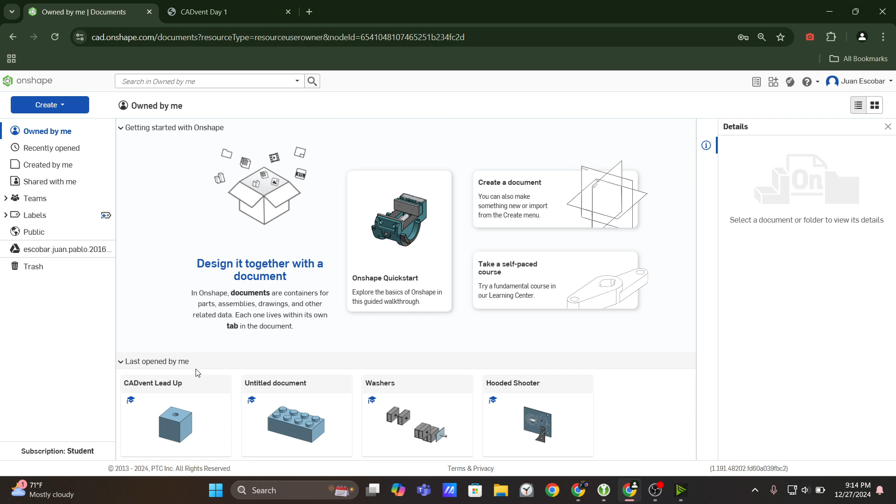Okay, let's see. I'm gonna go to my folder. Sorry for the delay. I should have had it open, but that's okay. Okay, let's make a new part studio. Okay, let's get started. It's only been, what, 40 seconds? That's fine. Okay, let's take a look.

So we have a cube, right? So that's the first thing I noticed. What's the general shape of the object and what's the orientation? So like we mentioned before, the default kind of view in drawings is what's called the isometric view. Let me show you what that is. It's a combination of the front, top, and side view, but basically you can go here and click isometric.

It's pretty similar to this top corner between the top, front, and right. Remember the orientation cube: we can click on faces to orient relative to those, and we can also click on corners. If we click on this top corner between the top, front, and right, that's pretty much this view. So I'm going to make this cube off this orientation. The bottom face of the cube, like if you were to lie it on the table, is going to lie on this top plane because it matches where that cube would go.

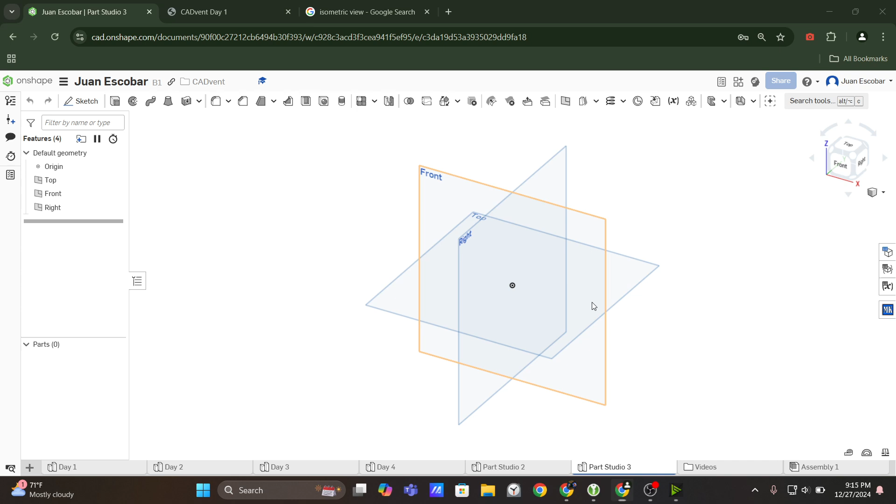If you can imagine where a cube's going to go, it's going to be like this. We're going to have the views pretty much align. Does that make sense? I'm going to make the object based on that. Obviously you can make it anywhere you want, but just for reference, that's where I'm going to make mine. I'm going to start with a base sketch. Remember, we can make sketches and extrude them to make objects.

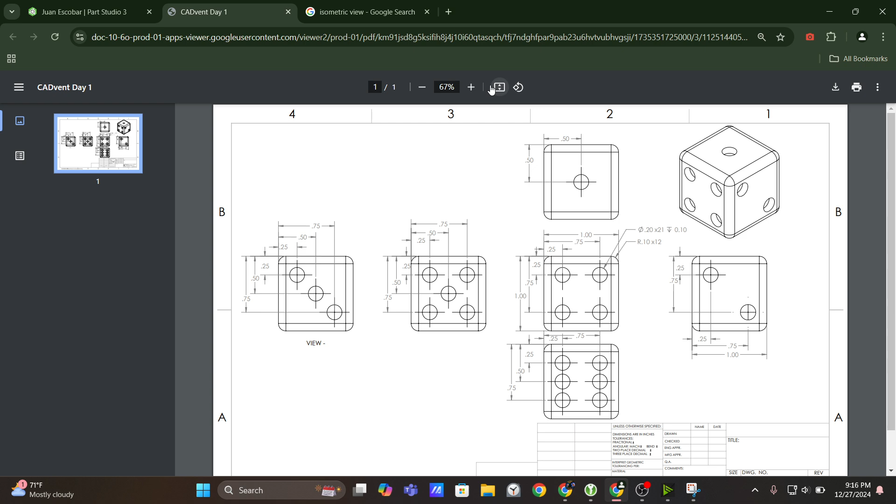So imagine I'm making this from the base up, but you can make it any way you want. It's just whatever's most convenient. The first thing I look for in the drawing is, what are the base dimensions of this cube? If I had to make just a square and extrude it, what would the dimensions of that square be? I talked about this once, but I'll talk about it again. When you have dimensions, it's really helpful to look at these arrows. There's a lot going on in this drawing, but the key thing to look at is arrows.

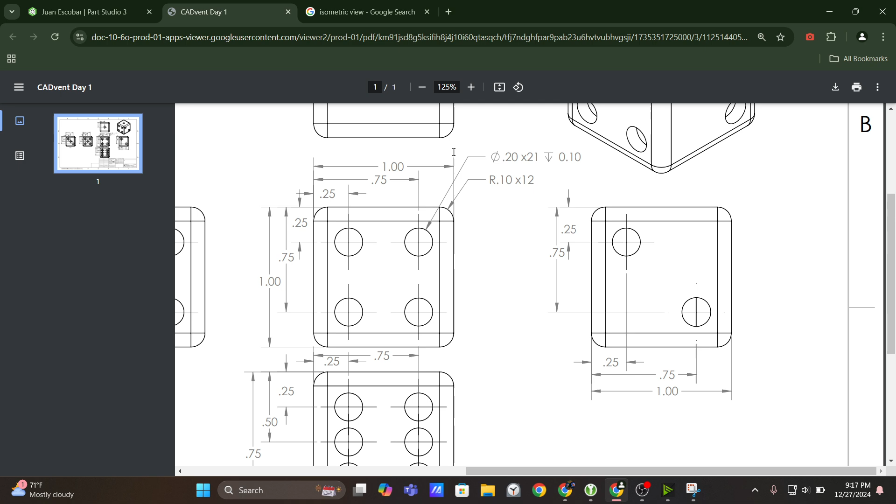If we look at this edge of this cube here, and then this edge here, the arrows go up to that line and whatever it is that they're marking. So it looks like the distance from one edge to one edge is 1 inch, and the distance from another edge to another edge is another inch. So I'm just getting the base dimensions. That's how I'm going to get started.

I'm going to make it on my top face, because I'm making basically the base. See how I clicked on the top corner? I'm going to make it on the top face, and then just extrude upward, like I'm building a building. You can do this any way, but that's how we're going to do it.

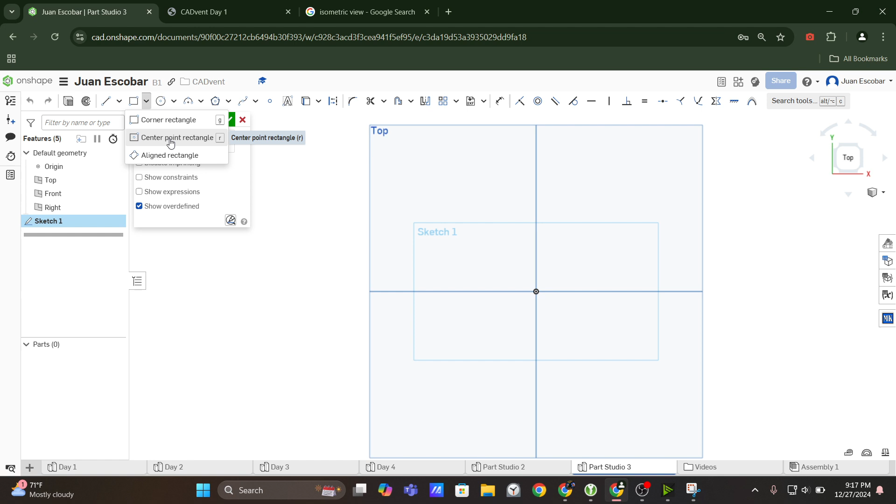Now I'm going to make a rectangle, but it's going to be a center rectangle. There's different types. There's corner rectangle, which is by clicking on two corners, and others, but the one I want is the center point rectangle. The advantage is I can make everything based off the origin, and that can be really handy later. So I'm going to just click once in the center, drag outward and click again.

Now the first thing I'm going to do, you can do this in any order, but I'm going to make opposite sides equal. So right now, to move objects you click on vertices, but both sides of this rectangle, both lengths, the width and the height, are undefined. So I'm going to make the width and the height equal to each other, the same length, which basically makes it a square. And now I'm going to make this an inch.

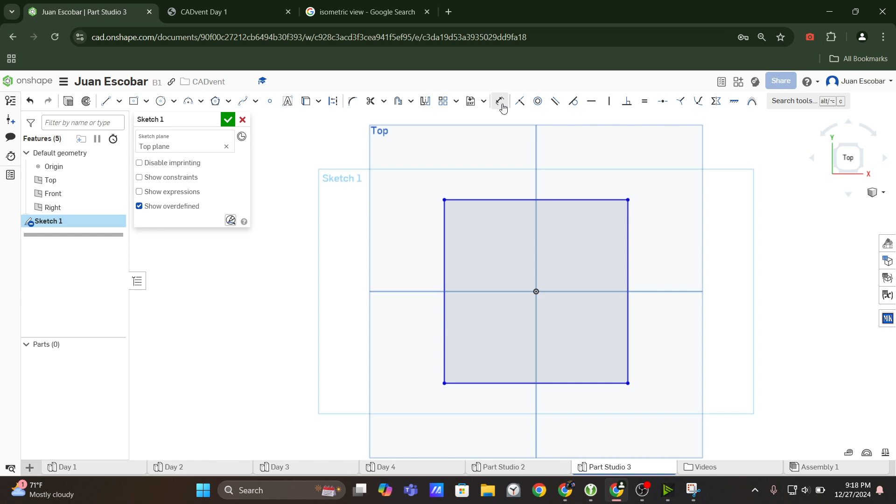So I'm going to press this dimension tool up here, click once on this length, drag outward, click again, and set it to 1 inch. And now what I'm going to do is extrude this.

So looking at this face, this view of 4 dots over here of the 4 sides is this view up here in the top. So this 1 inch dimension is telling us the height of this cube, whereas this dimension is telling us this dimension over here, and this dimension on the 2 side is telling us that.

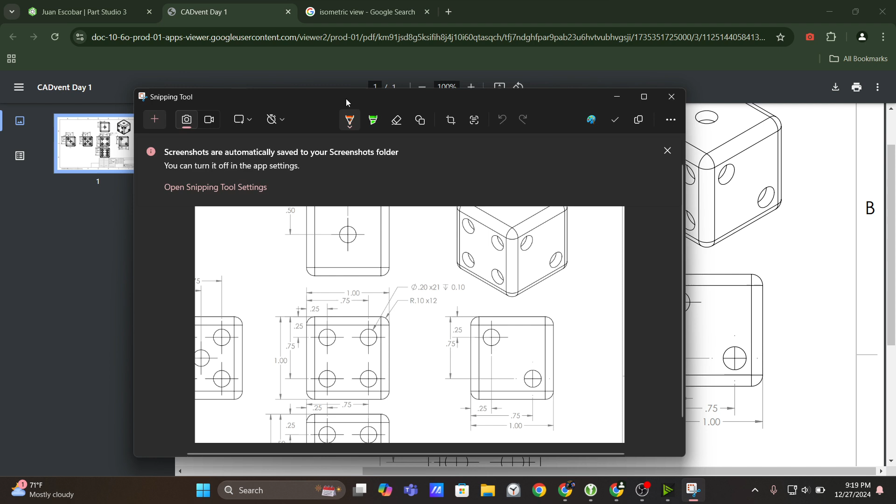And I'll show you what I mean. I'll make a quick sketch, just so this 2 face right here, this orientation corresponds with this up here. This other orientation, I'm going to just be as descriptive as possible. Feel free to skip it if I'm going over things that make sense.

But I just want to cover everything because I know sometimes it can be confusing. So see how those drawings align? Essentially this 1-inch dimension, remember the arrows, it goes up to here, and this other arrow goes up to here. So this dimension over here corresponds to basically the width of this cube.

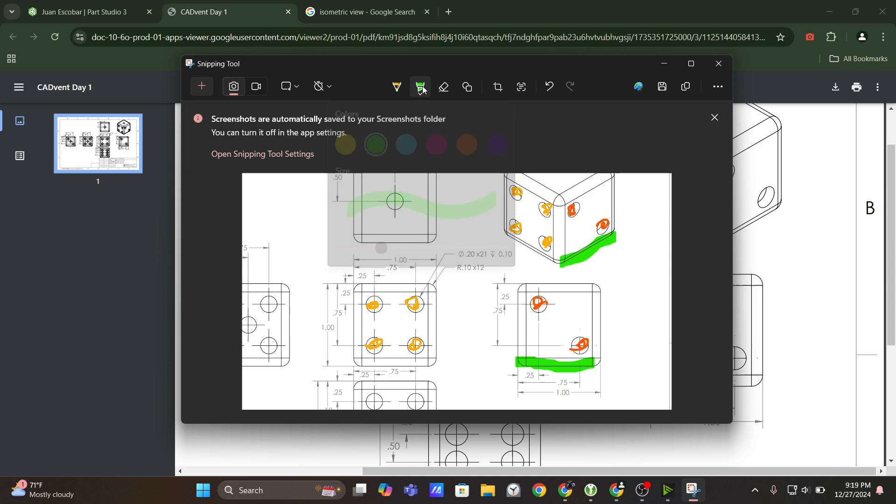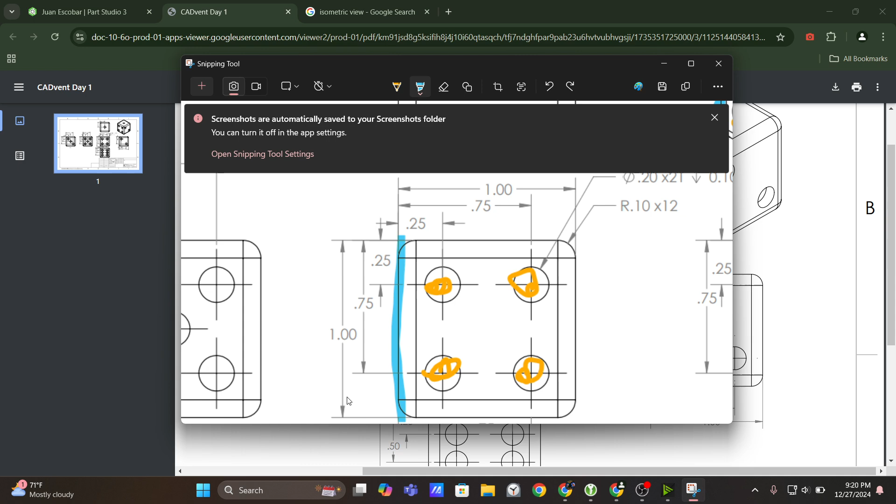Let's see, we're going to go a different color, blue. This dimension here is going to correspond with the height of our cube, right? Because basically, see the arrows, see how that arrow points to the line which goes to the top edge, and this arrow points to the line which goes to the bottom edge.

Okay, and now we're going to do the last one just so the point's clear. This top part of this drawing, again oriented on the 4-dot face, is this line. So that kind of tells us the base, the width, and the height, right?

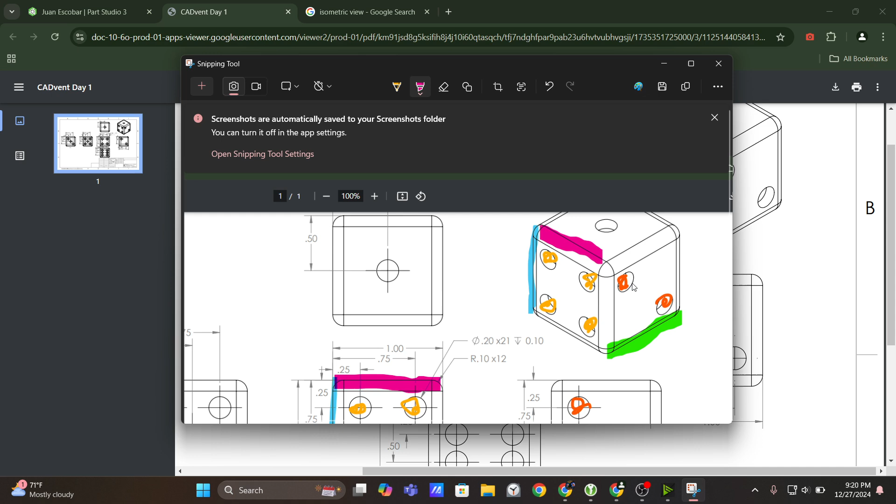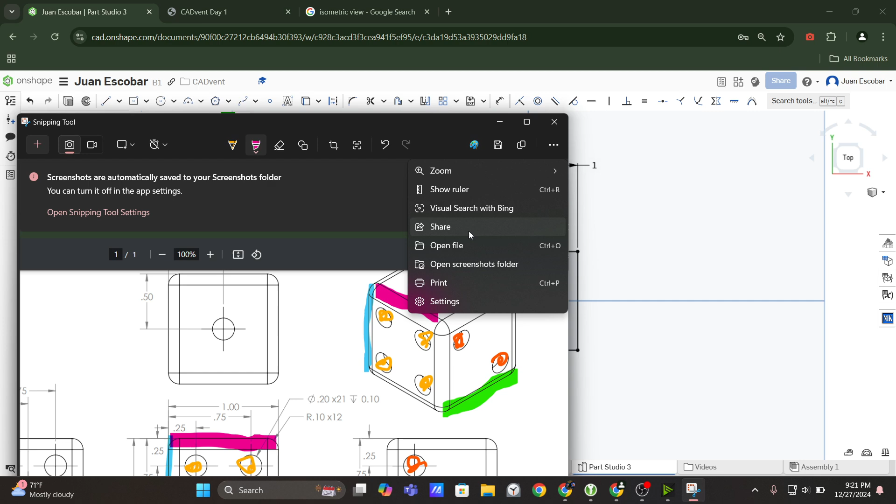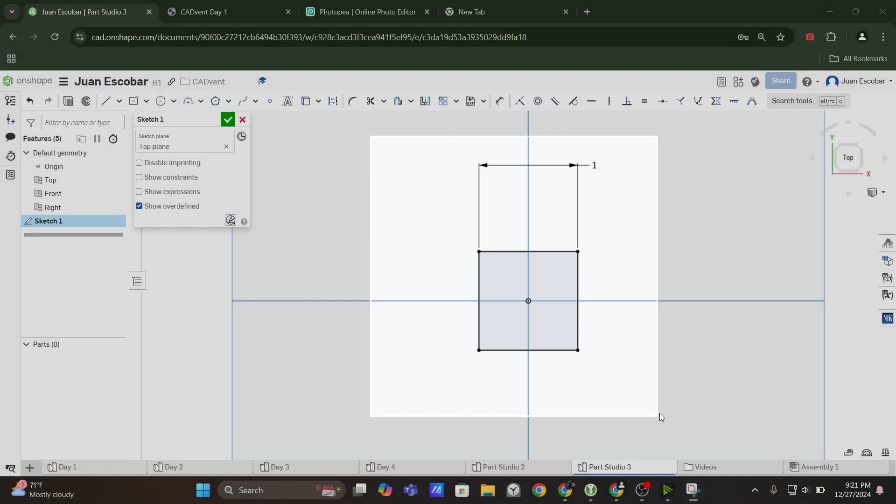Okay, but we have this view, right? So if we look at the top view now, a view from the top, if you imagine looking at the cube from the top, this pink over here is this dimension, right? And then the green is this dimension over here. So basically we're just making a top view with these dimensions that we found in our drawing, and we're like, okay, it's 1 inch by 1 inch by 1 inch.

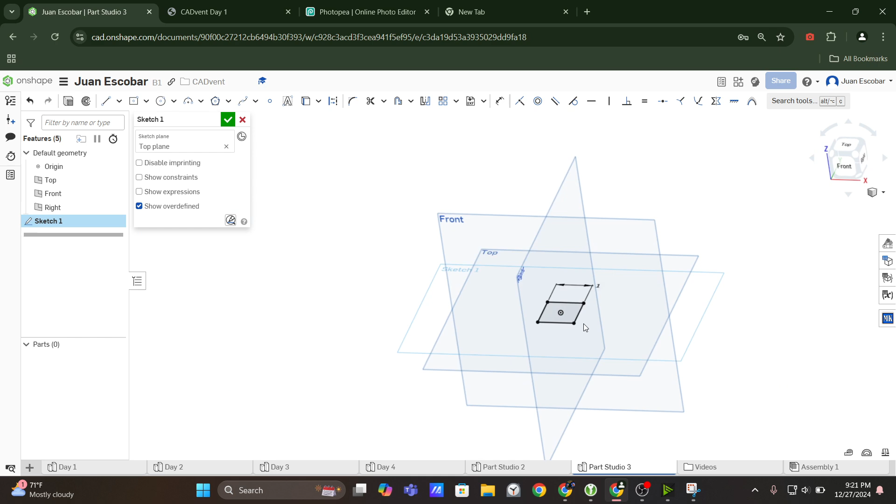So now we have our base of our cube, and now we're going to extrude it to the height, which is 1 inch. I'm going to click on the sketch, and there's a couple ways to do it. You can click on it in your view plane, or you can click on your sketch. So I'm going to click on this face here for starters, and extrude it the height, which is 1 inch. So now we have our base cube.

These rounded corners are fillets, and we'll add those at the end. But to get started, I'm going to talk about a couple of things. So let's take a look at that original drawing. Just like I talked about this again, whenever I'm talking, visuals really help me, so I'll include that for you too.

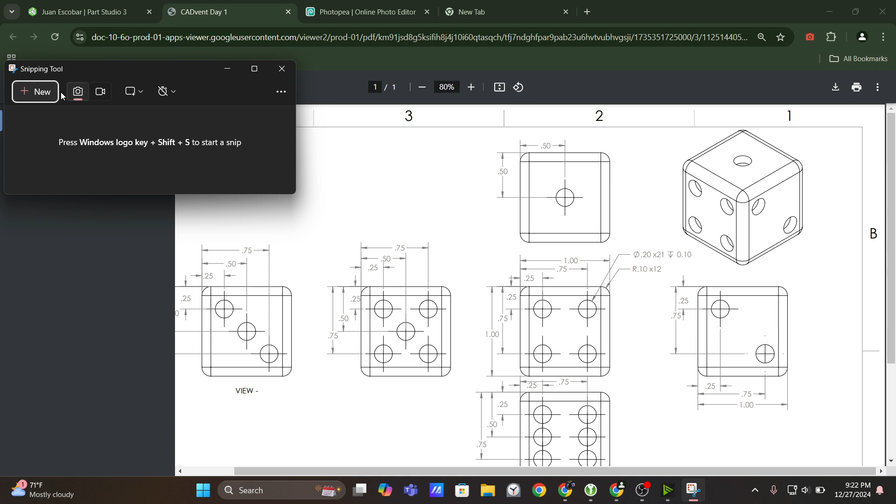So I'm just going to be as detailed as possible. So if we look at this view over here, all our views of our part line up with each other. So I'll explain what that means. Let's orient ourselves with this four-dotted face of our part.

So this on our main part is going to correspond over here on the drawing. What do I mean when I say all of the views of the part line up? Well, if you look directly to the left or to the right, you're going to see the 2-dotted view. That 2-dotted view directly to the right is basically like moving over one face on the cube.

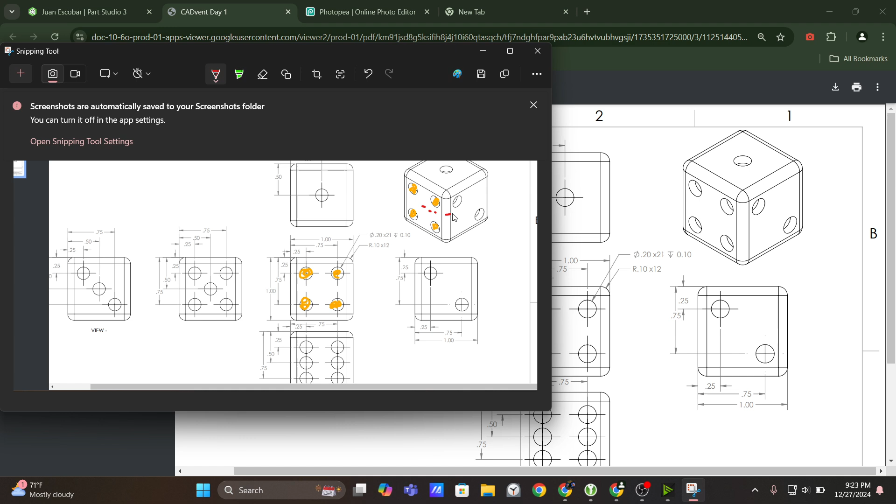I'm drawing hand signals, but you can't see them. Just imagine traveling over to this face now, and now you have this side. So that's what I mean when the drawings of the part line up. Looking directly to the left is basically moving around the cube, and that's going to give you this face over here.

Notice how in this face, the yellow is exactly horizontal with this part here. Basically, if you imagine drawing your finger along the face of the cube, it's going to exactly line up and be horizontal. So that's what I kind of mean.

Now, directly above is going to be the one-face cube. It's like moving up and going up a face. Does that make sense? These different views that are shown here are kind of like unwrapping this cube. Moving to the left or right is like rotating the cube, and going up is like looking at this top view. So they all align, and hopefully that makes sense.

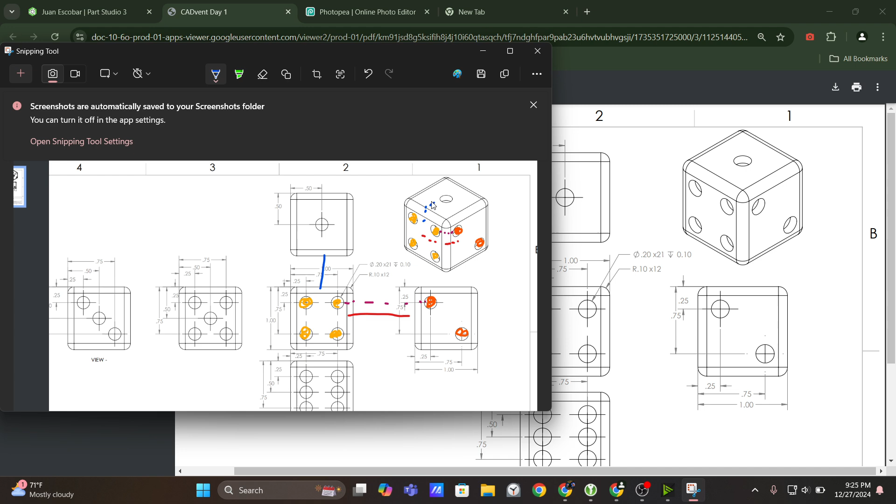So I'm going to start off with making the one on the top. We know it's at the top because we can look at this view here. The first time we made a sketch on a plane, but this time I'm going to make a sketch on a face. I'll click on the top face of the cube, since that's where we want it to show up, and click sketch. Then I'll orient myself using our orientation cube, click the top face, and zoom in.

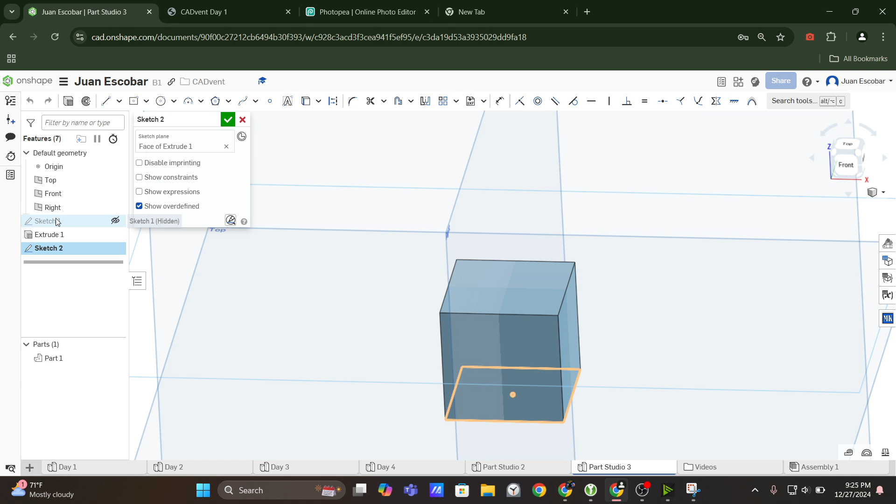Because we made our original sketch based off the origin, looking in the sketch, the center is the origin. So I can just make a circle from here and it's going to be from the center. I'll show you how to verify the dimensions. Now I'm going to go to the circle tool up here, click once for the center, drag out, and click again.

This circle has a dimension of 0.2. If you look here, this little circle with a line drawn through it represents the diameter of a circle. So if you look closely, the line drawn through that is like the diameter. So 0.2 is going to be the dimension, the diameter.

Times 21 means that same dimension of that circle is repeated 21 times, so that means it's for repeated dimensions. If you count the actual number of circles: 1 through 21. There's 21 of them, and all of them have a dimension of 0.2.

And then what does this last part mean? This is the depth of the extrusion. So these circles are going to be extruded inwards, removing material 0.1 of an inch. Hopefully that makes sense. But the diameter is 0.2. So I'm going to go over here, click on the dimension tool, click on the outer edge, drag my mouse outward, and click again.

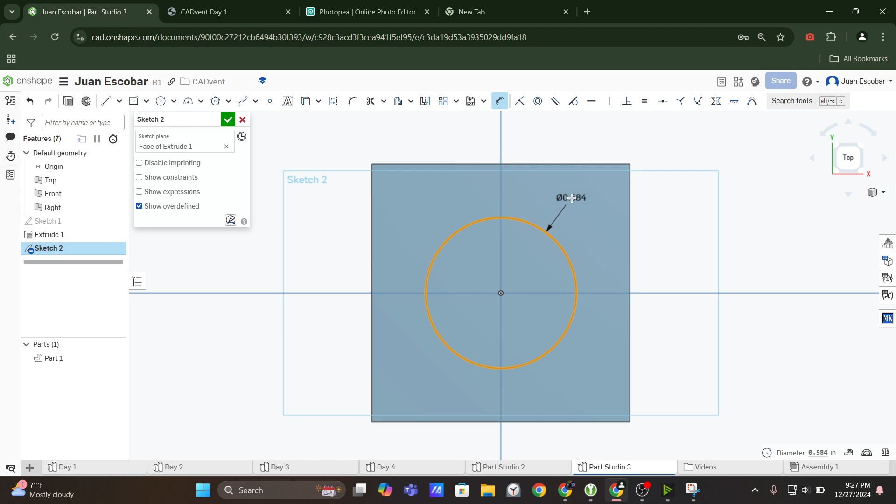I'm going to set that to 0.2. And because we made it on the origin, when you're making a circle, these auto constraints pop up. See how when I'm hovering directly over the center, there's a little icon there on the side? That's a constraint — that's coincident.

Coincident basically means two or more entities touch each other, as Onshape defines it. So if I click here, you see that icon, meaning the center of the circle is going to be exactly on the origin. Now we won't be able to move the circle around.

But let's say I didn't make it on the origin — I made it somewhere else. I can click here, then click on the center of that circle and drag it around anywhere I want. It's not constrained. But when making that initial circle, we can make it coincident with the origin. Hopefully that makes sense.

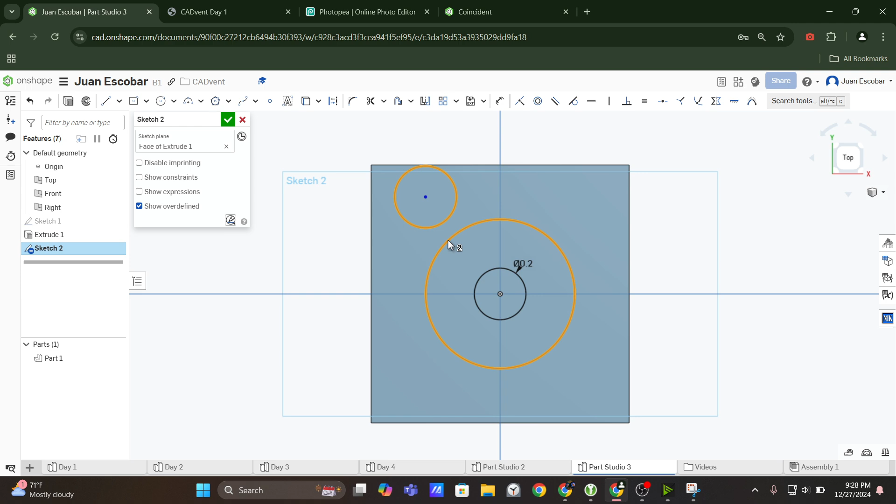Now, how do we verify? This has these dimensions here, 1/2 inch and 1/2 inch. How do we make sure it looks like it's in the center? Well, first of all, you know it's a 1 inch by 1 inch cube, so that is exactly half.

But if you wanted to check, I can click on the center of the circle, the origin, and click on the outer edge of the cube. Now if I go to the dimension tool, you'll see a couple of things — it'll show the minimum distance between both points, but also a breakdown between these coordinates.

If you look at the red dotted line from here to here, that distance is equal to 1/2 inch. Then the green distance tells you the vertical distance — the distance from here to here, same as it would be over here — and you can see it's 1/2 inch too. So it matches up in our drawing, and the circle is exactly in the center.

Now I'm going to press the check mark to confirm our sketch, and click extrude. I'm going to change it — these extrudes, the circles go inwards, they're removing material, so I'll click remove. Remember how I said we can click on either the face we want to extrude, or we can click on the sketch on the side.

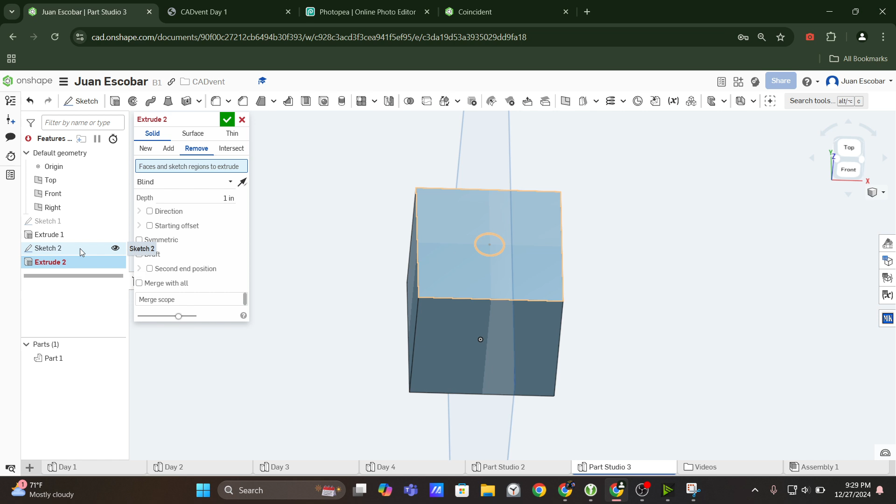So I'm going to click the sketch on the side. Remember the depth is going to be 0.1, so I'll set it to 0.1. And bam, look, we got our very first face done. You can click on that corner, that top corner, like I said, and now you see how this is lining up here.

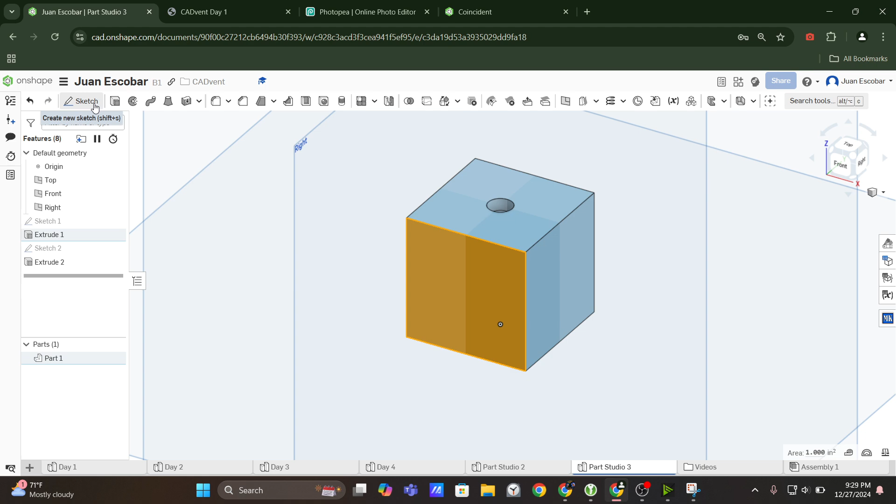So I'm going to do this 4-sided face, which is right below in the view and rotated down one. I'm going to click on this face and click sketch. Now we're going to do this.

Just to keep things simple, I'm going to make 4 circles, and then I'll show you how to use the linear pattern tool — I know we talked about it, but I want to show you as a reference. So I'll start off with making 4 circles, and remember all 4 circles have an equal diameter, so I'll just place them down randomly.

I'm going to click on the outer edge of all of them and make them all equal, with a dimension of 0.2. Remember, I can just do one of them and all of them will update to the right size because I added that equal constraint.

And now I'm going to dimension from the center of the circles. A lot of these dimensions are kind of overwhelming, but you can see it's from the top; if you look at the arrows, it's from here to here. This whole horizontal distance here is going to be 1/4 inch. If you look at the arrows here, this vertical distance is going to be 1/4 inch. So from here to here, remember that dimension view from earlier, is going to be 1/4 inch and 1/4 inch.

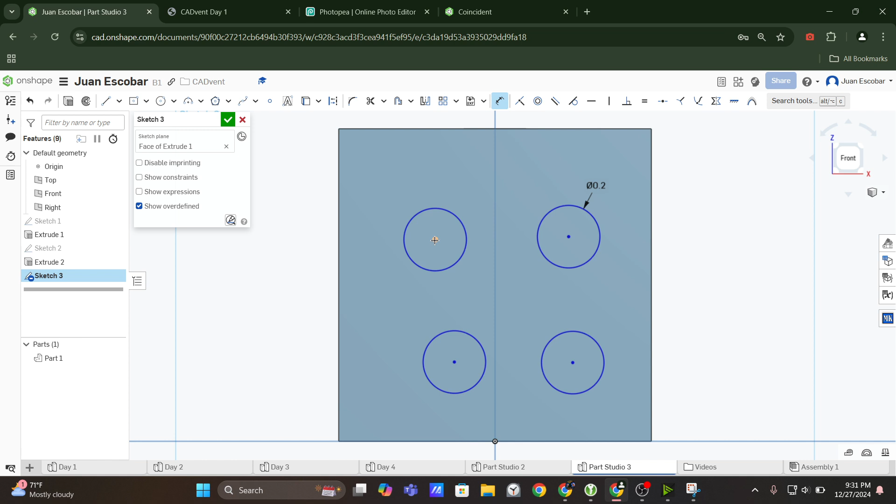So that's what I'm going to do. I'm going to click dimension, and I'm going to do it a couple different ways just so you see. You can dimension from a point to a line, and I'm going to set it to be 0.25. And I'm going to do from a point to a line. Remember, there's different ways of doing dimensions, but I'll do different ways for each one. I'm going to set it at 0.25. Now, for this bottom one, you can see also, if you look vertically, it's also 0.25 from the side.

So just like I clicked on here and then the line, I can also click on the 2 points. If you remember how we did from a circle to a corner, we had the breakdown. You can kind of specify, I'll show you. I clicked once on the center, and now I'm going to click on the corner. And see how we have the 3 options? Remember those 3 dimensions from earlier? We had the minimum distance, the horizontal part, and the vertical part. So I'm going to do the horizontal part. I'm going to click confirm, and I'm going to set it to 0.25 inches.

Now, what's the distance from here to the top? Well, let's look at our dimensions from the center of the circle. So I'm going to look horizontally. See that arrow pointing? That line goes all the way up to the top. And from here to the top is going to be 0.75. So I'm going to click dimension, and I'm not going to do the corner this time. I'm just going to go from here to the top face and make that 0.75 inches. Cool. Now, what am I going to do?

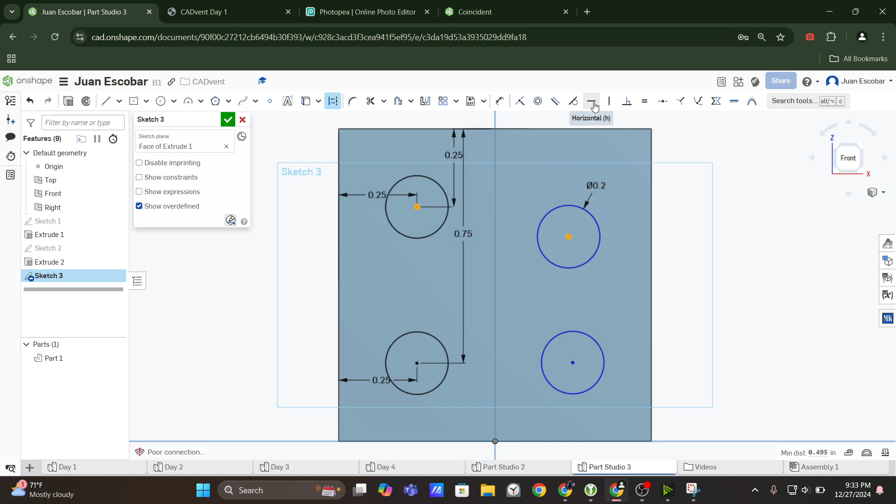I can do a couple things. These dimensions kind of just repeat. For this other circle, it's also going to be 1/4 inch. For this bottom circle, it's also going to be 0.75 inches. And you can see that they're exactly horizontal in the drawing. So, just to change it up a bit, I'm going to add a horizontal constraint between the center of this circle and the center of this circle, and I'm going to click horizontal to make them horizontal. Now this circle is constrained in space to move only horizontally relative to this other circle.

The 2 points are horizontal, and I'm going to do the same thing for this other one and add a horizontal constraint. And notice another thing, these 2 circles over here are vertical. Isn't that pretty cool? They're vertical, so I'm going to add a vertical constraint, clicking on the center and on the center and making them vertical. And now you can see by adding constraints, we're limiting the position of where these can be.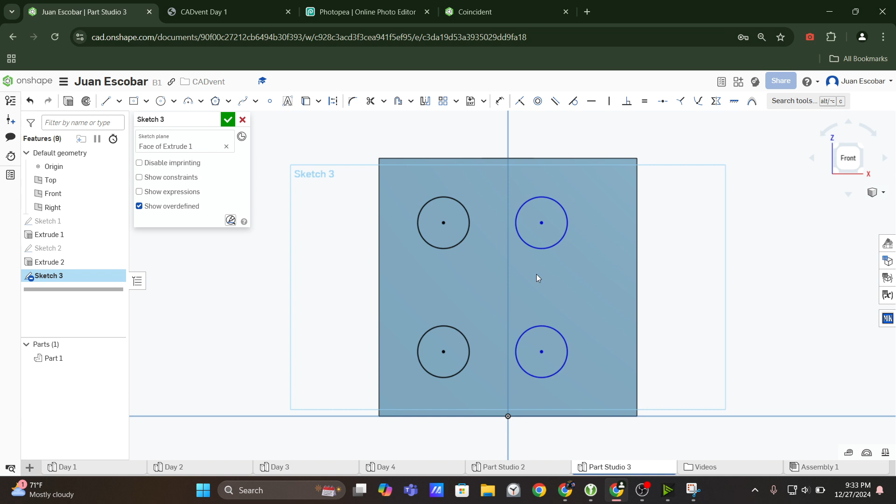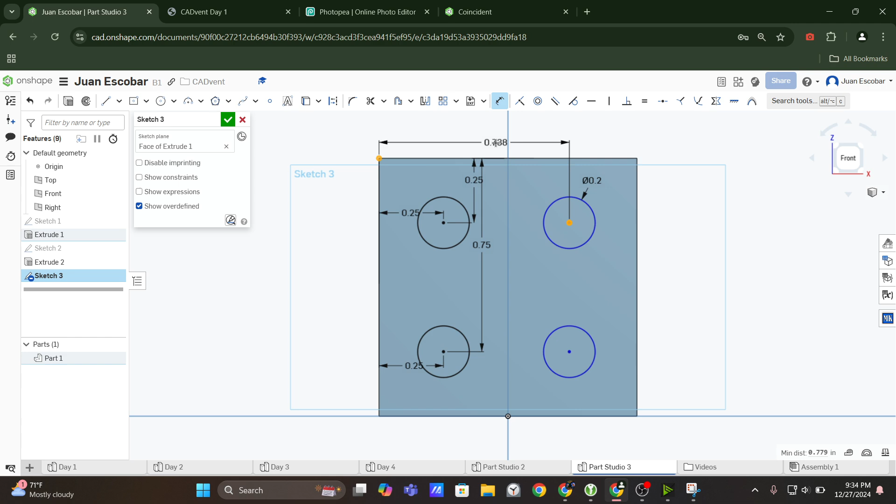So what's next? What dimension are we missing? The only motion that we have right here is side-to-side motion. So we're only missing a sideways dimension from here to another part of the cube. The center of this circle to the outer edge is 0.75, 3/4 of an inch. So I'm going to click on the center, and I'm going to do the corner because I want to. We have the minimum distance, and I'm going to do that horizontal distance, and it's 0.75. And notice I click enter, and now we have this fully defined.

And notice there's way more dimensions on here. There's 1, 2, 3, 4, 5, 6. We only have 1, 2, 3, 4, 5. Okay, we have 5, almost as many, but you can add constraints to minimize the amount of dimensions you have. Instead of adding another dimension from here to the top and from here to the top, we can just make horizontal and vertical constraints. Hopefully that makes sense. Now I'm going to click the check mark to confirm, extrude, and remember these have a depth of 0.1 inches.

So I'm going to make that a depth, change it from add to remove, and change it to 0.1. And I'm going to make it inwards. Click check mark to confirm. Now we have the 4 circles done. Oof, look, we're breezing through it.

Okay, what's next? Now we're going to add these 2 circles. And for that one, I'm going to just draw them manually. And for this bottom one, I'll show you a linear pattern. So I'm going to just click on this face, check our drawing, make sure it lines up, and click sketch. And now I'm going to click this right face on the cube to orient us, and I'm going to zoom in with the scroll wheel.

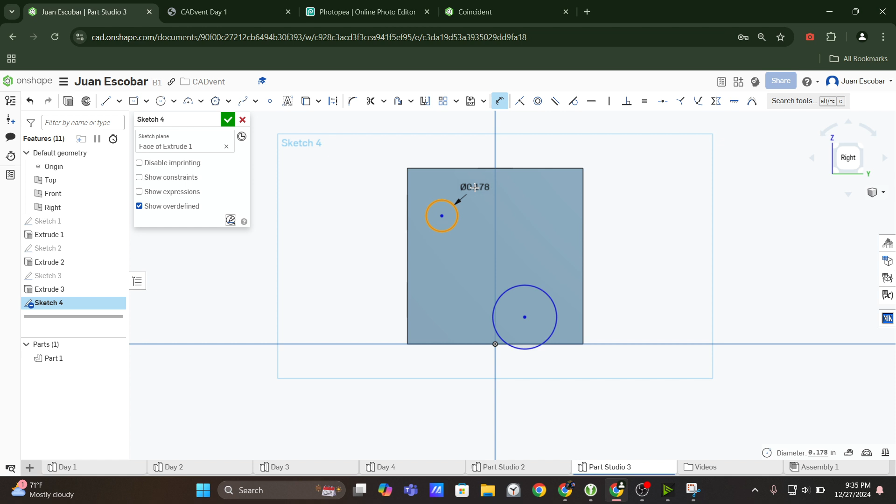And now I'm going to add 2 circles, make them equal to each other, and set the diameter of them to be 0.2. So I'm going to press the dimension tool, click on the outer edge, click again, 0.2, make these 2 circles equal by pressing E or clicking up here. And now we're going to add our dimensions from here to the edge.

So let's look down because we do have a dimension down here. From here to the edge, looking at the arrows. See, these are pointing to that line. Check where the arrows point. So basically from here to here, it's going to be a distance of 0.25. So I'm going to add a dimension of 0.25 from here to the edge.

From here to the edge, looking here vertically, 0.75 from here to here, looking at the arrows. And see, the arrows are on the inside, whereas here it's on the outside, but just check where they're pointing and you'll see how that works. So I'm going to make a dimension from here to the outer edge and make it 0.75.

Bam, and now see where our circles are defined in space? They can't move at all side to side, but they can move vertically. So that shows me that we're missing a vertical dimension. So how much distance is there vertically, either from here to the top or from here to the bottom? We do have a dimension here that's from here to the top. So look at the arrows, to the top, 0.25.

So I'm going to add a dimension, make it 0.25. And you can also move these. So I'm going to click and drag just so they look nicer. You can move them around, you can move the number, you can do all sorts of things. And now it's black, which means it's fully defined and it can't move at all.

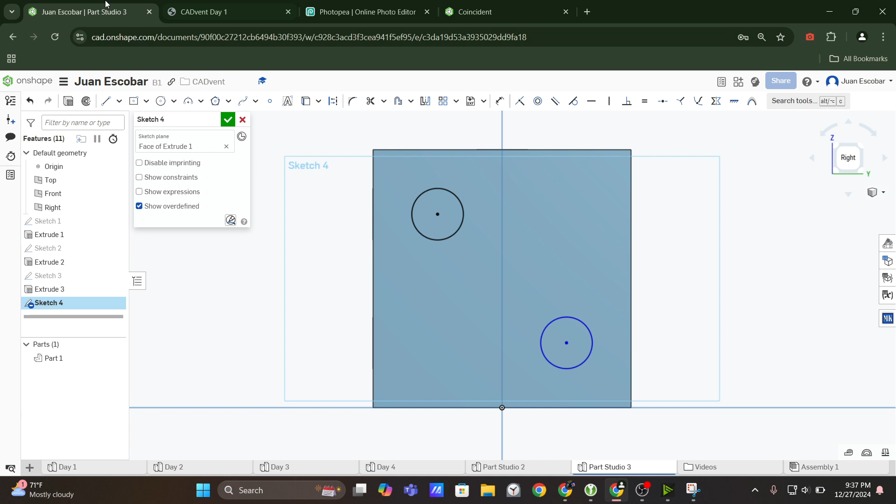And now let's look at this bottom one. It can't move at all side to side, but we're missing another vertical dimension. So from the center of the circle to the top, if you look at the side, it's 0.75.

So, bam. And I know it can be kind of overwhelming because you look at the whole drawing and it's like, oh, look at all these dimensions, how am I going to do this? But it's just taking it one step at a time, because you see, we didn't even use all these dimensions. We only used 4 of them. And right here, there's way more. Like this 1-inch one is from earlier, and we didn't even have to look at it at all to make it. And now everything is black, it's fully defined.

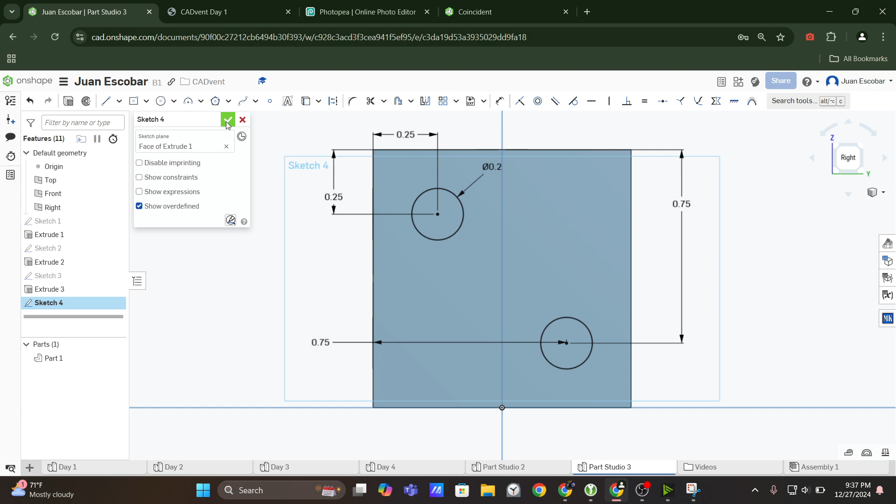I'm going to press check mark, extrude, click on the sketch, change it to remove 0.1 inches, check mark to confirm, and bam, look, we've got it. These faces line up. So what am I going to do next? Now I'm going to do the 6-sided face, which I'm going to use a linear pattern for.

So remember our orientation from earlier, which is here. Directly above the 4 inch is the 1 inch, so that's like moving upward. Directly to the right of it is the 2 inch, and that's like moving to the side. So directly below it is the 6-sided face, 6 indents, whatever you want to call them. So that's going to be like rotating. Instead of going above, it's going to be going below.

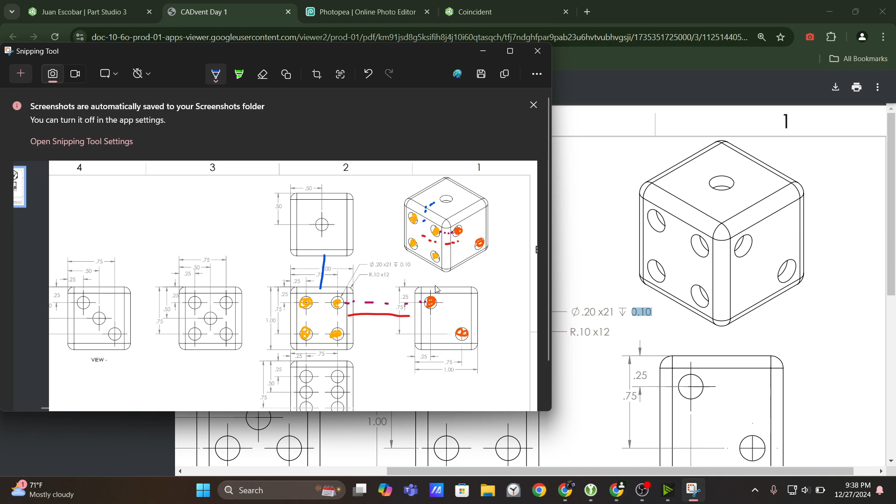So what that looks like, I click on the top. Instead of moving up, pretend that I'm looking at the front. Instead of moving up to the top face, starting from the 4, I'm going to just go down, and you can click on these little, oh, wrong direction. I'm going to go down and go to the 6-sided face.

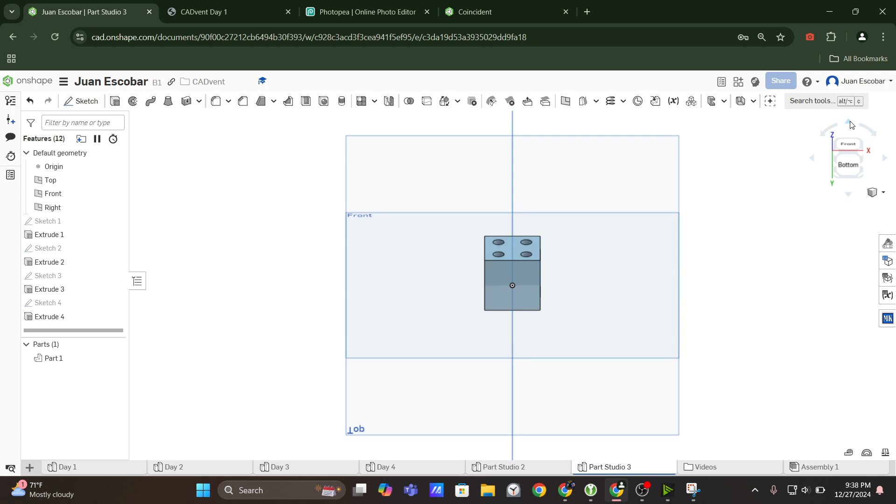So right here, right now, we're oriented to where we want to be. And the 6-sided face should be made here. Now notice it's kind of upside down, but that's okay. It should be based on this view right here. So now I'm going to get started. I'm going to make a linear pattern.

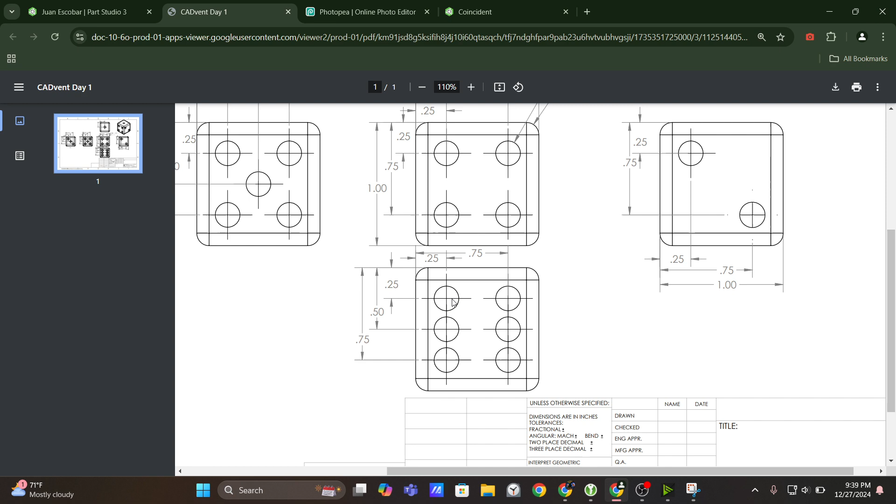So how do linear patterns work? Basically, you can make one element and then make an array of them after that. So I'm going to start with just this one circle and make the rest of these circles based on the distance between, because it's repetitive, right? So the distance from here to here is the same as from here to here.

See how those repeat, and the distance from here to here is the same as the distance from here to here, and on the bottom and from here to here. So they kind of repeat, and you can just set one distance downward and one distance horizontally, one vertical and one horizontal, and then the rest of them will just pop up.

So I'm going to start with my first circle, which is going to be a diameter of 0.2, like we remember, and I'm going to define it in space. Basically, where is it? So from the top corner, it's 0.25 inches, looking at the arrows here to the edge, and from here to the top edge, it's 0.25 from here to here and 0.25 from here to here. And you can verify with those dimensions.

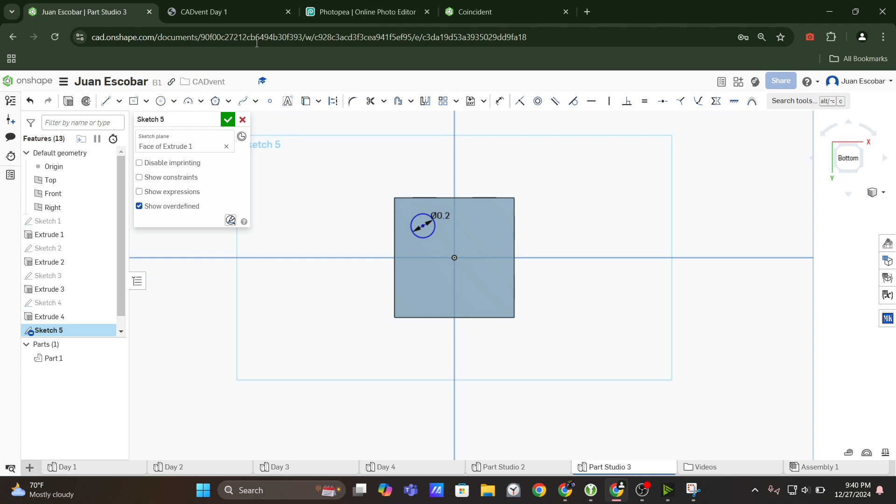So I'm going to set it with from here to the top corner, 0.25, here to the top corner, going vertically 0.25. And now this one is set in space. And now I'm going to repeat the 6. So just like I talked about, linear pattern is right here. If you're not sure how to find it, you can click search and type in linear pattern.

And see how we have the 2 arrows? These 2 arrows basically control the directions of where the array is made. So I'll show you what that means.

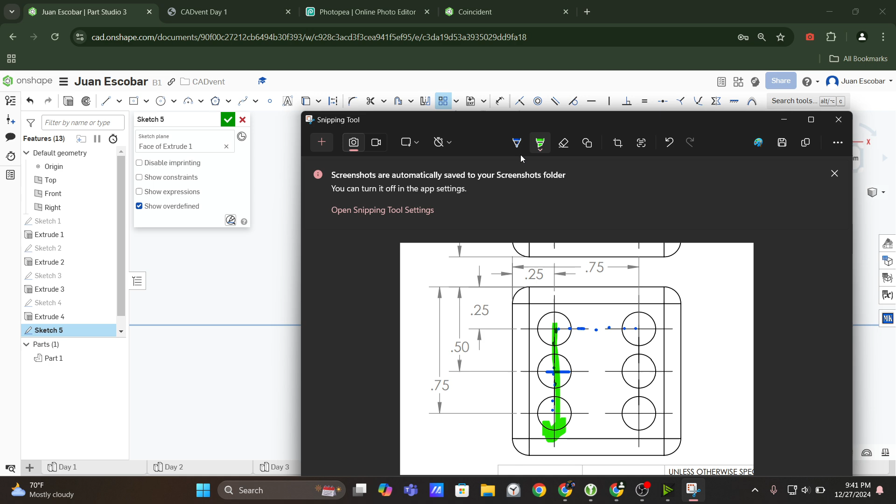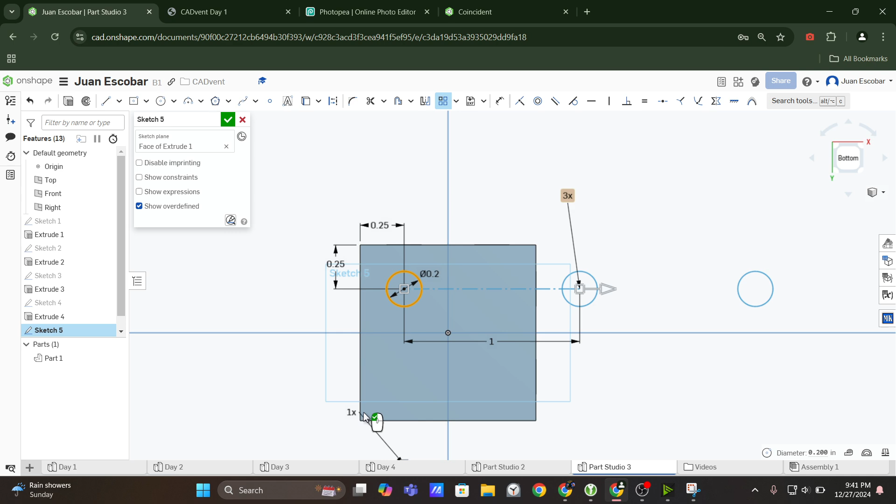Imagine one of the directions is going from here with like an arrow, and then the other one is going over here. It's kind of like setting your axes a little bit, but you can click on these arrows to change their directions. So I'm going to make this one go down and this one go to the side, and see how they're lining up. And there's also these times 3x, 1x, and this controls how many times I should pattern this in this direction.

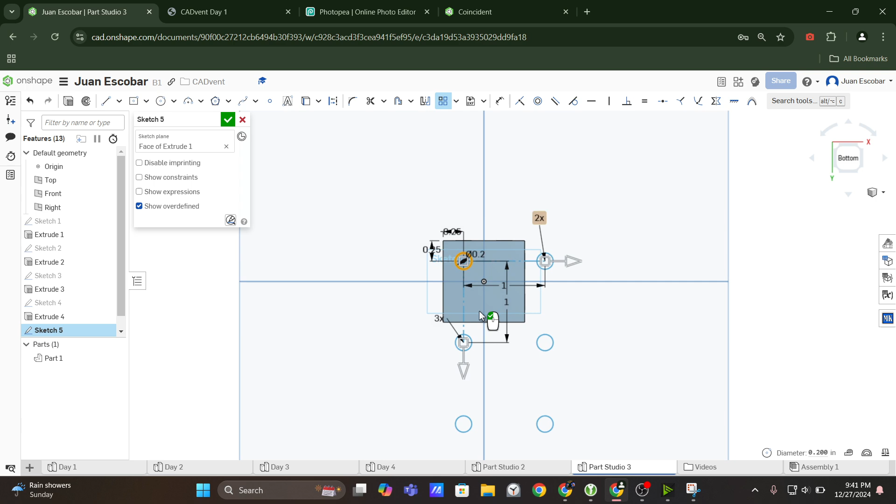So if you look in this direction, we only have 1 and then 2. So I'm going to change this to be 2. And then in the bottom direction going downward, I have 1, 2, 3. So I'm going to change it to be 3. Double click and click 3. And now if you look, we can drag these arrows and basically change where these should go.

And now I'm going to move these dimensions out of the way just so they're clear. I haven't yet confirmed this feature. But what I'm going to do is I'm going to confirm it. You left click and you see that icon next to the mouse. You left click to confirm.

And right now, because of these dimensions that are just arbitrarily there, everything's fully defined because the distance from here to here is set, and the distance from here to here is set in these dimensions. But these dimensions aren't right. So now what we can do is we can double click on them to change them. So I'm going to double click on this, and you can see the distance from here to here.

Well, the distance from the center of this circle to the edge is 0.25 inches. The distance of the center of this circle to the edge is 0.75 inches. So the difference between these two is 0.75 minus 0.25. That's the difference. And you can just do that with your dimensions to make it a difference.

And now the distance from here to here, well, how do I know? Well, you can do the same thing again and say, okay, the difference between 0.5 and 0.25 is 0.25. But let's say we didn't want to do that for some reason. I can just click on this dimension and get rid of it. And now, see how it's blue again? These aren't constrained vertically because the distance between these isn't set.

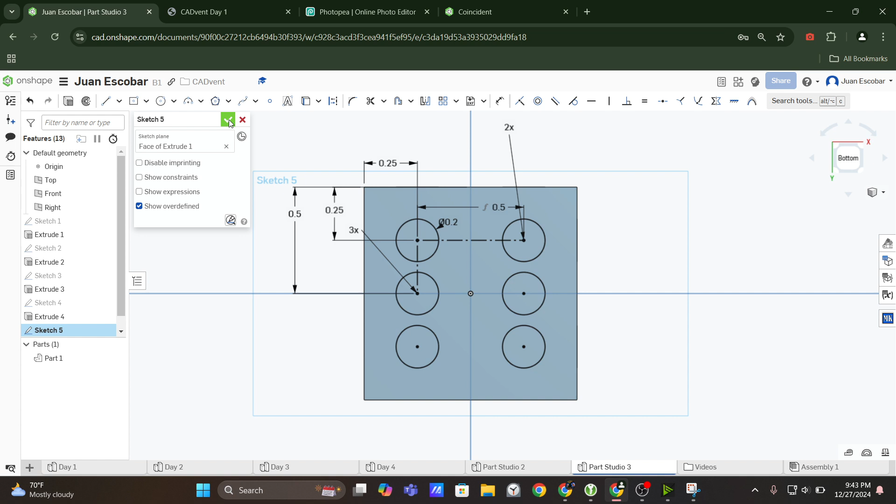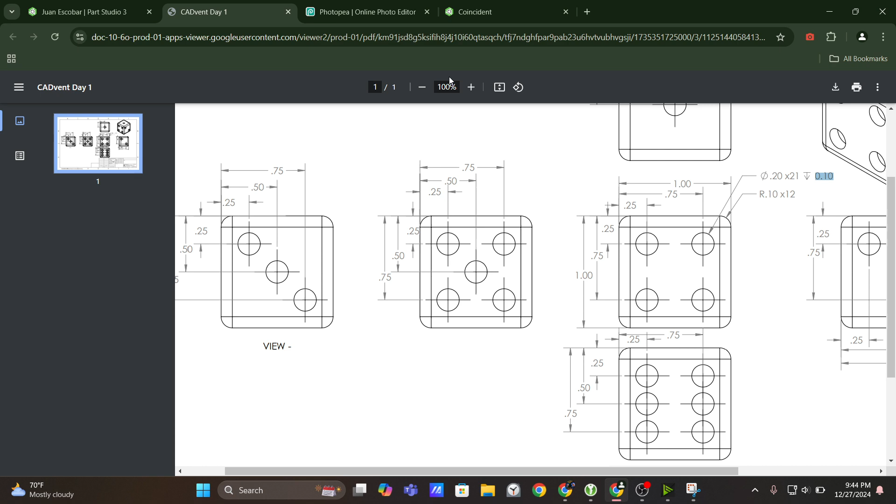And now I can click and everything's black, so we're all in the clear. I'm going to check to confirm, and look, we did it. We have the six-sided face, so I'm going to click check mark, remove, change the direction, and make it 0.1. Fantastic. And so look, even though the 6 wasn't in this top drawing up here, we knew because it was below that it would be right under in that direction. So now what's left? We did this side, this side, this side, this side. So we've just got these other two left.

So I'm gonna go to this 4 side, and again, it's like rotating to get to the 5. And you can also just click on the left, or if you were just looking here, you could be like, oh, okay, it's going to be the left, front, and then left. And you can just click on the left up top there. Now we're going to have this 5 pattern.

How are we on time? A little long. That's fine. Never hurt anyone.

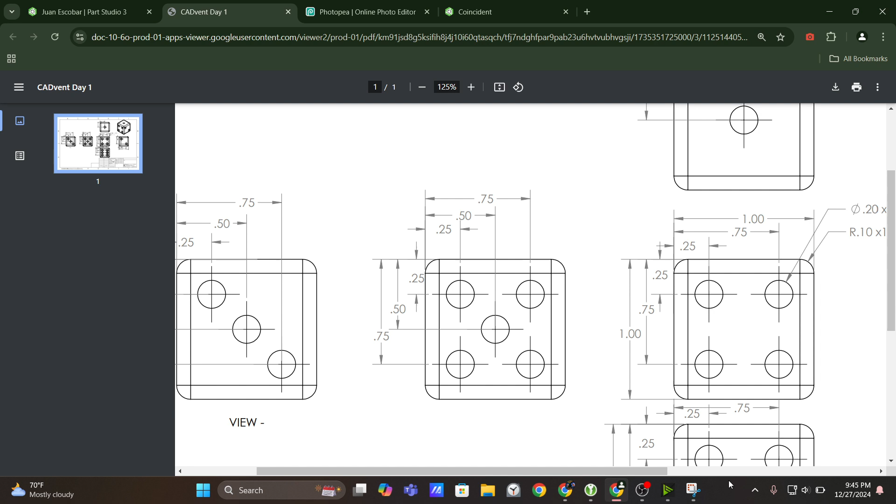And I'm going to click sketch. If you can follow along as you're doing this, that would be awesome. And we can get it done. And so I'm going to take a look and say, okay, what's actually happening here in the sketch? We've got all these dimensions, but what do I see when I'm looking at this? So just like we have a pattern here with an array of these in both directions, I'm going to see if I can actually find one here.

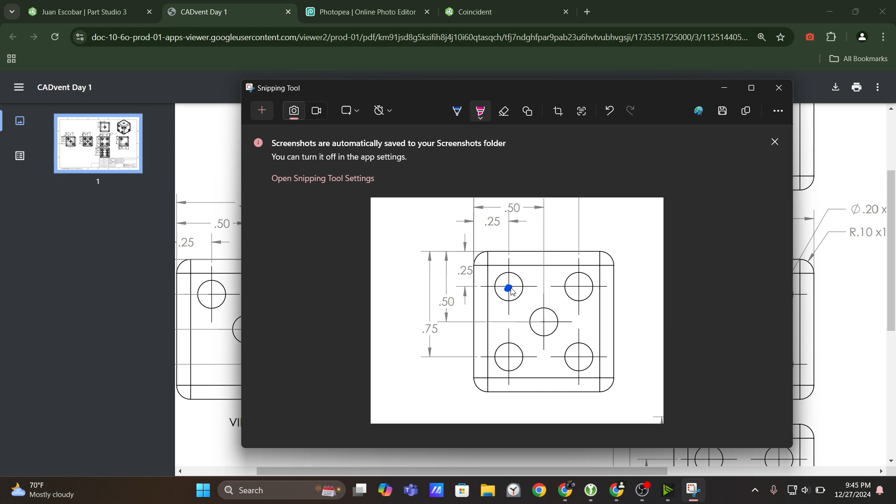So we have the center circle, and we can kind of see how going in one direction, we have another circle, and then going in the other direction, we have another circle here. So we have essentially these 4 circles that are in a pattern. 1, 2, 3, 4. The horizontal distance from here to here is the same as from here to here, and this vertical distance is the same as here to here. So you can make this a linear pattern.

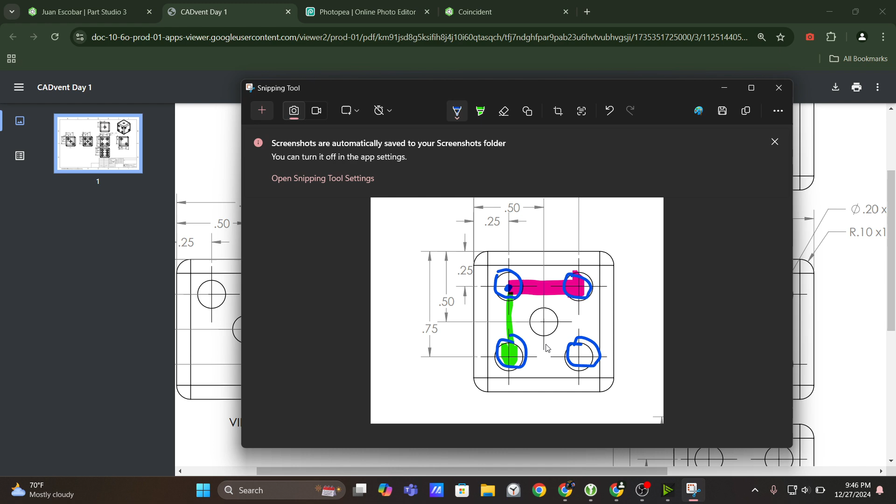Basically, make this top circle defined and add these 4 based on the distance between here and all the other elements, and then just add an extra circle in the center. So that's what we're actually going to do. I'm going to make a top circle, 0.2, as we know, and set it in space. I wonder if it'll be 0.25 and 0.25. Guess what? It is 0.25 and 0.25 from here to the top and from here to the side.

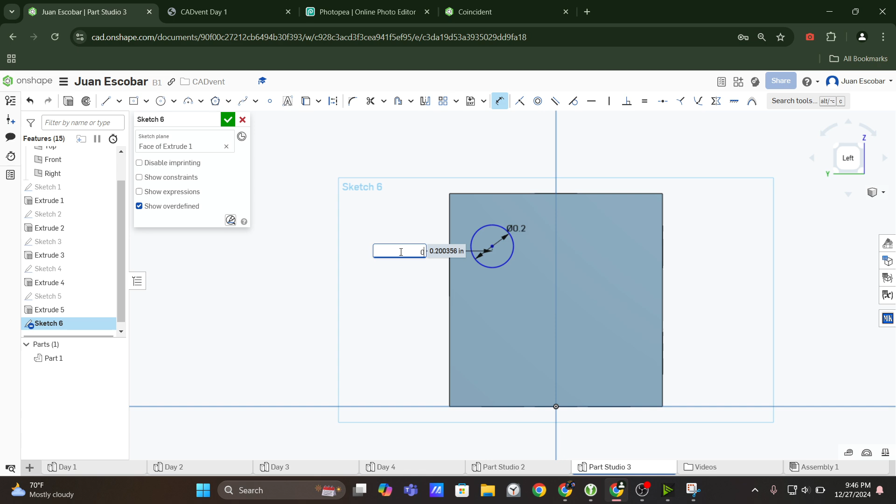So I'm going to press dimension. I'm going to do from here to this side here, set it to 0.25, do this. I'm going a little fast, but hopefully everything that I'm doing makes sense. 0.25, 0.25. Cool. I'm going to move it over here because I kind of don't like where it looks, and see what we're matching up. Now we're going to add a linear pattern.

I'm going to click here, click linear pattern, click on my arrows, change direction. So now we're going down and to the side, which matches up here, down and to the side. And it's going to be, whoa. See how I confirmed that? I accidentally did that. That was an accident. And now I don't have the other direction and I can't change it.

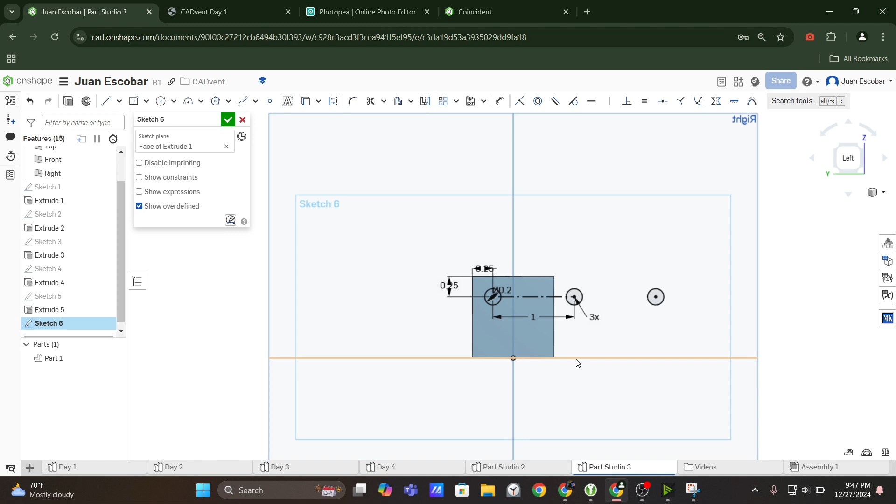So what I'm going to do is I'm going to simply Control Z to undo. So I'm going to click it again, linear pattern again. It's not a problem. And now I'm going to change the direction, and it's 2 by 2. So I'm going to set this 2 by 2 and drag these arrows roughly to get them in place. And now I'm going to zoom in.

And let's say these dimensions are useless. I'll get rid of them both. Just to reiterate the other thing that I said earlier, you don't need those dimensions necessarily. Right now, these are all just defined as they're linear. It's a linear pattern, but you don't necessarily need those 2 dimensions. So I'll just set an arbitrary direction.

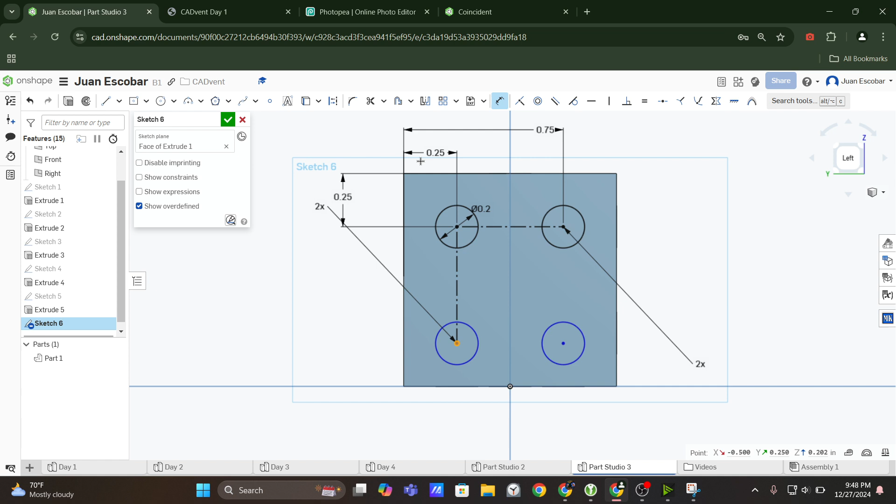So from the center of this circle to the edge, looking vertically, here to the edge is 0.75. So I'm going to add a dimension from here to the edge, 0.75, and from, let's say, this bottom one from here to the top, it's 0.75. From here to the top, 0.75. And now we didn't necessarily have to have the distance between each of them, but we can just add the dimensions that we know. And bam, we've got this.

And now we've got our center circle in the center, which again is 0.5 and 0.5, which we do know to be exactly in the center. So how do we do that? Let's say right now we don't have the origin here exactly where I want it. So there's a couple of ways we can do this. We can add a center and add the 0.5 dimension, the 0.5 dimension. But what I want to show you is auto constraints.

See how I have the origin here? I can make it coincident. I can add a circle here, but that's not what I want. What I want is this circle to be vertical with the origin. So if I hover over the origin, and then I drag my cursor upwards, see that little vertical line? That means the center of the circle that I draw is going to be exactly vertical with the origin. So if I click here, you can see now the center of the circle is vertical with the origin.

But now what I can also do is, when you're hovering over lines, you can find their midpoint. So see that little dot that pops up as I'm hovering over the line, that point? That is a midpoint. That is the center of this line. So let's say the distance of this line is, I'm going to click on this edge and dimension it. Oh, that won't actually work. I'm going to use the measure tool. Let's say it's an inch across. The midpoint is going to be half of that distance, so 0.5.

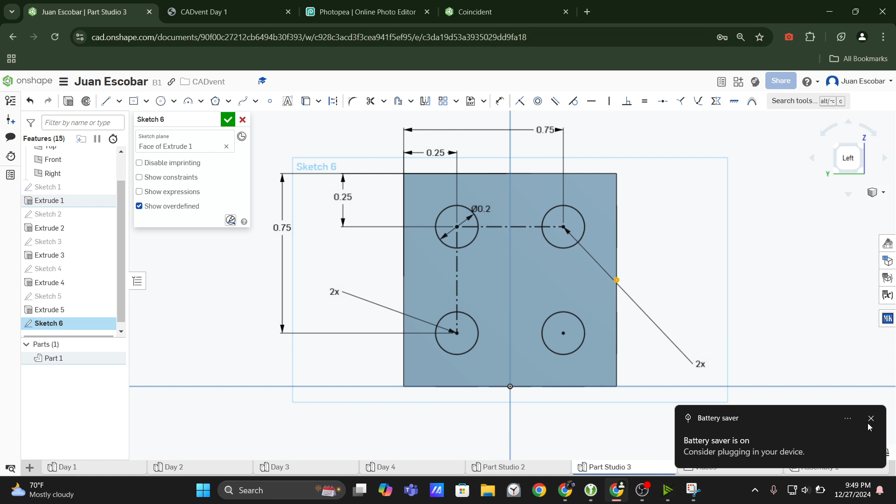Hopefully that makes sense. So just like I made the center of the circle vertical with the origin, I can also make the center of the circle horizontal with a midpoint, a point that doesn't actually exist yet. So I'm going to do both of them at the same time. Well, first, no, I'll show you how to do it horizontal to the midpoint, and then I'll show you how to do both. If I hover over, the midpoint will appear. See that little constraint there? See that icon? That is a midpoint constraint.

So basically, if I click now, it'll be on the center of the line, but that's not actually what I want, right? I don't want it to be on the center of the line. What I want is for it to be horizontal to the center of the line. So if I hover over, see that midpoint constraint, now I can move my mouse horizontally, and basically it'll add the midpoint and then make the center of my circle horizontal to that midpoint. See how it added the midpoint? And now the center of my circle is horizontal with that point that we added. Pretty cool, huh? Now what I can do is click on the center of the circle and the origin and make them vertical.

And bam, now we've got the center of our circle exactly defined. It's black, it's where we want it to be. It's vertical with the origin and horizontal with the midpoint.

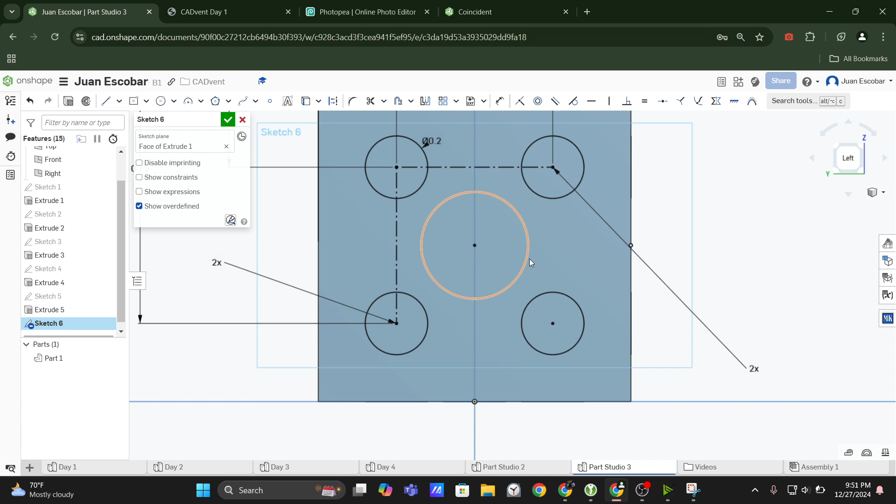But we can do both of those at the exact same time, just when I'm making a circle. This might blow your mind, but we're going to do it.

I'm going to start with the origin, hover over the origin, see that coincident icon, and move vertically. Now I'm going to hover over the midpoint, move to horizontally, and now we have that horizontal.

See those orange dotted lines? And now if I hover over here, you can see both the vertical and the horizontal lines. It is both vertical from the origin and horizontal from the midpoint.

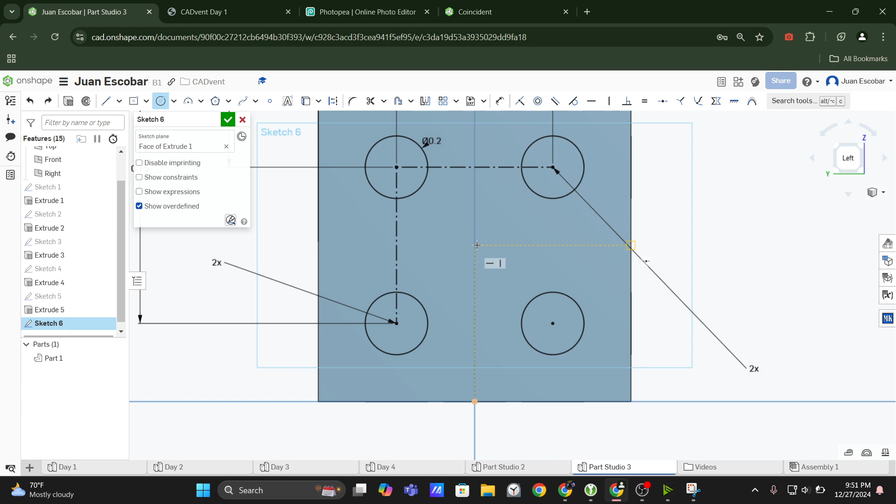So in one swoosh, I can add it, and now I just click and draw our circle, and see the center is exactly defined. It automatically added the midpoint, automatically added the horizontal constraint, and automatically added the vertical constraint, which I think is pretty awesome. That's kind of cool, huh?

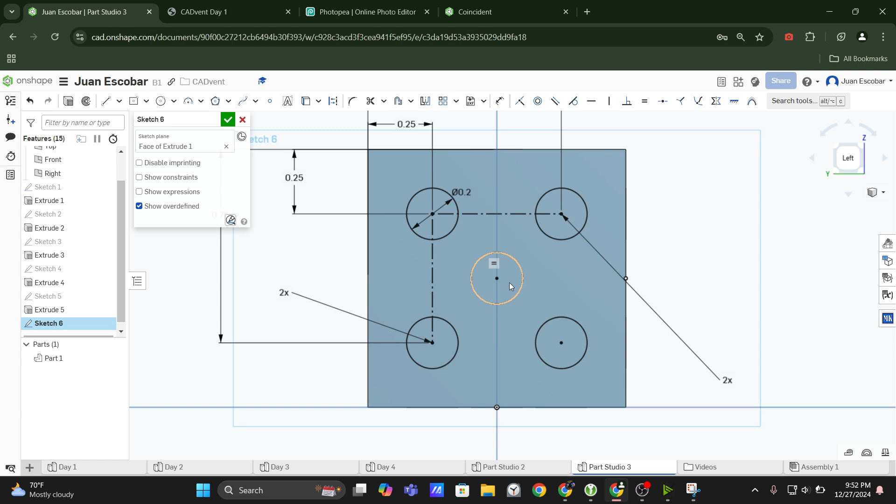And now I can just click on the outer edge, and I'm going to make it equal to this circle with the equal constraint. So see how we just did that all with constraints? We didn't even add any dimensions here. We just auto-constrained it to be exactly in the center of the square because we knew it was half an inch and half an inch.

We're doing so great. Oh my gosh, we have one face left. Okay, let's confirm this. Extrude, remove, 0.1 inches. Click on the sketch, inward, and confirm.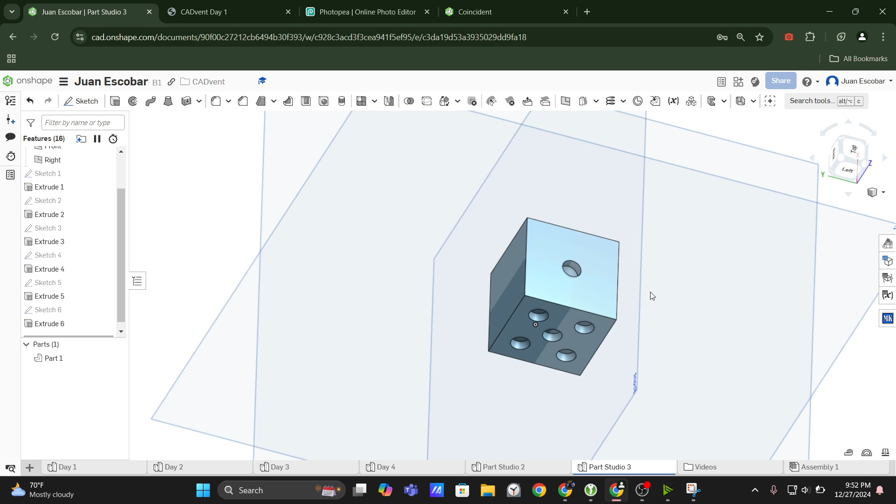It's looking pretty great. And remember, let's say I don't know what I'm looking at. Look at our cube right now, we're looking at the left face. Let's say I want to reorient myself. I can rotate around until I see the front, top, and right, and click, and look, boom. Look, we're so close, we've just got the back face to do.

So, you know how we just did the 5 face over here, and we were just looking at it from here? Directly to the left of it is going to be the 3 face. So if I click on the left face, directly to the left of it, beep, beep, beep, beep.

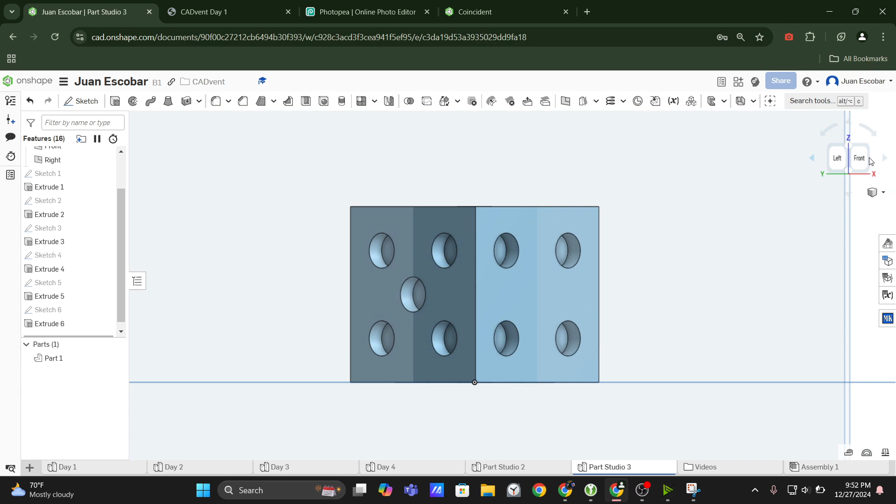Oh, wrong direction. Directly to the left of it is going to be the back. So you can also just look, okay, to the left of it is going to be the back. And now I can just click on the back up here in the cube, and bam, we're oriented.

Click on the face, click sketch. We're so close, we've got three circles. So I'm going to just quickly speed run. Click, click. Oh, see how it automated vertical from the origin?

Do we want that? Yeah, I guess, it's 1/2 inch and 1/2 inch. So we can have it be vertical from the origin. So circle, circle vertical from the origin. Why not? And then circle here.

But let's say you didn't want it to be vertical from the origin. Because sometimes what you can do is you want to add something, but it auto constrains it, and it's not an auto constraint that you want. So let's say I'm just out here in space and see, oh, it's adding a horizontal constraint from the origin.

Let's say I didn't want that. To disable auto constraints as you're drawing something, you can press Shift. And now it'll get rid of that auto constraint. So now no auto constraints will pop up because I'm holding down my left Shift key.

But in this case, we do want an auto constraint, so I'm just going to make it vertical from the origin. Quickly going to make these all equal by clicking on the outer edge, pressing E, or clicking equal up here. I'm going to press E to make them all equal.

Press dimension, which is the dimension tool. We're pressing D. Click once, outer, click again, 0.2. Bam, we've got 3 circles.

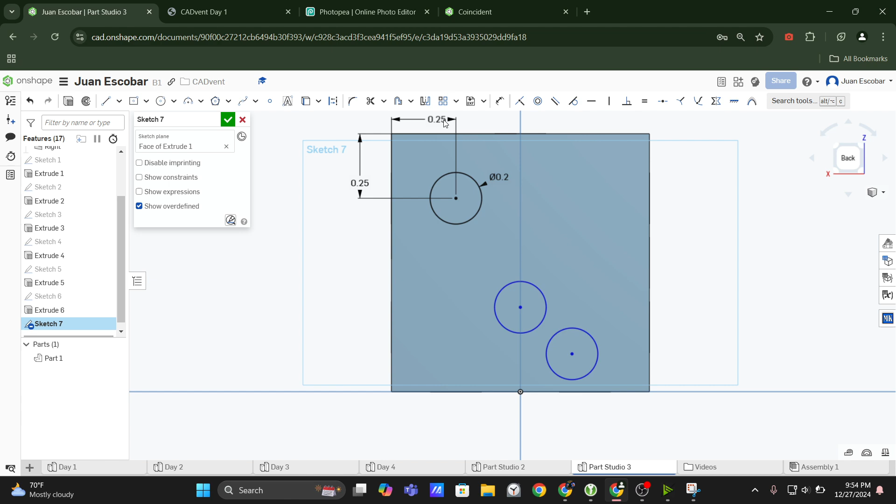This one's already vertical. See, you can see how it's already constrained. The best way to know what is something going to do if it's not defined is clicking on it and moving it around.

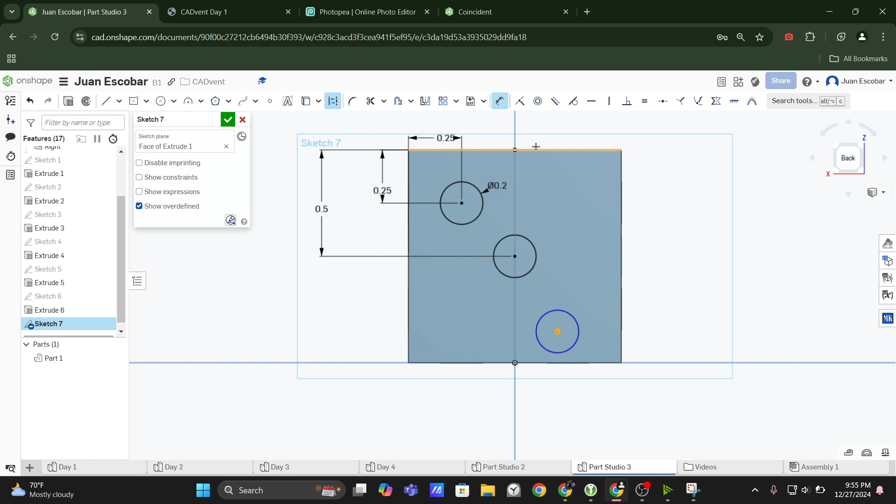And you can see, it's constrained horizontally, but now we'll constrain it vertically. From here to the top face, looking to the side, is 0.5, so I'll click here and add 0.5. Last one, here to the side looking vertically is 0.75, and from here to the top is also 0.75. So I'm going to add those last two dimensions, and we are done.

Basically done, we have fillets to add now. Click check to confirm, extrude. Click on here, click remove, make it 0.1 depth. By the way, you can change the direction by clicking on this here.

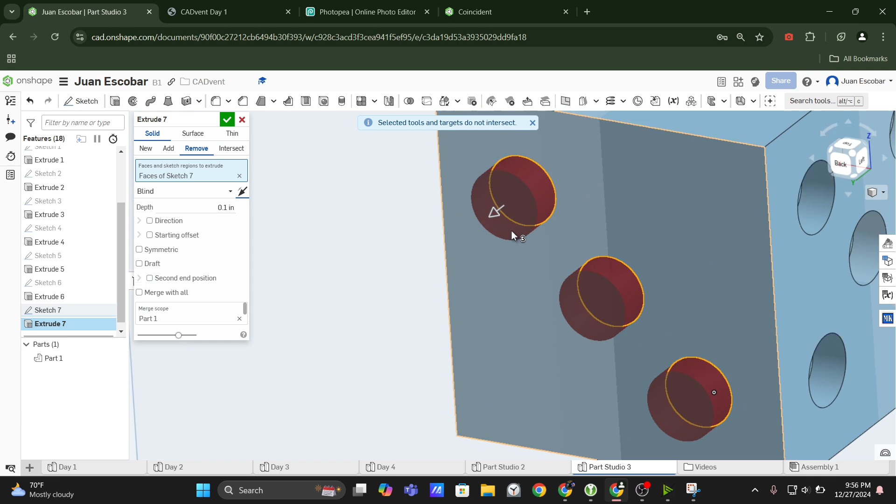So let's say it removes - it's going to be like, oh, they don't intersect. Well, because you can't remove any material in this direction because there's no material out here. So you can click on this arrow here or this arrow there to change the direction. Press check to confirm. Voila.

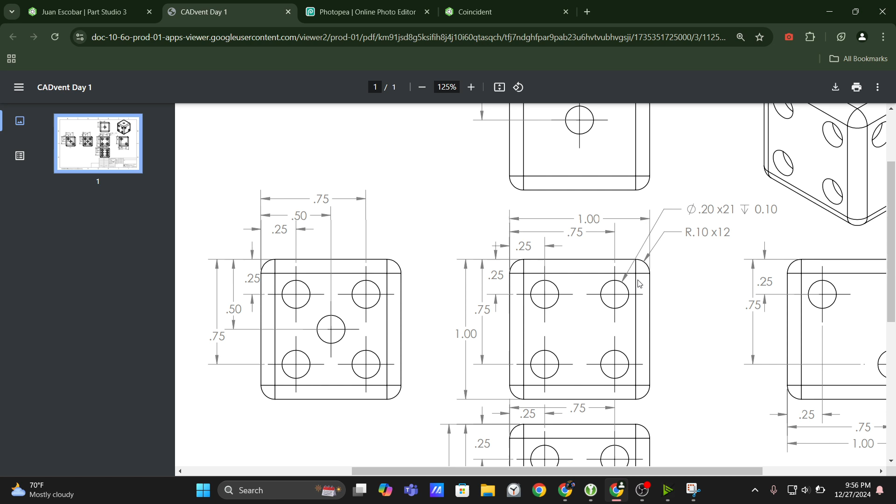All our faces done. Now we'll add the fillet. What is a fillet? If you look in our very handy dandy Discord, fillets round interior or exterior corners. If you look in day 4 in our day 4 thread, you'll find more information there. But you can see this R - the difference between R is a radius. Remember this icon up here is a diameter, this R is a radius.

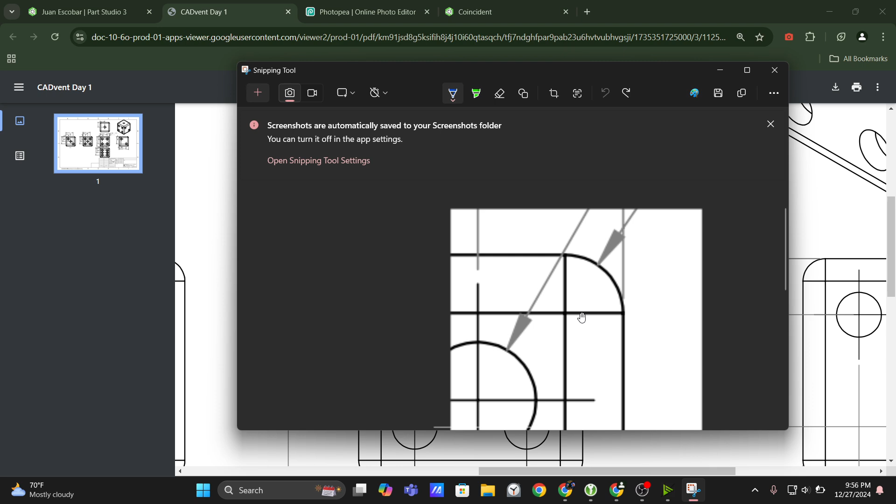So the radius, if you imagine a circle over here, we're going to zoom in. If you imagine a circle - that's a very well drawn circle if you ask me. I'll try again, I can do better. This circle has a diameter or a radius. That's what the R is for - the R is for the radius of that circle.

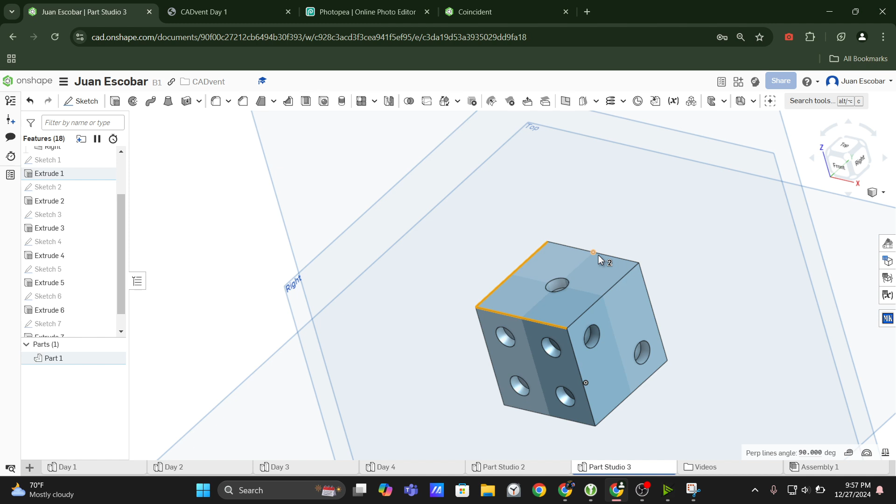So it's going to be 0.10 radius, times 12. Why is it times 12? Well, if you count, look - 1, 2, 3, 4, 5, 6, 7. There's 12 edges of the cube, I think. Yeah, there's 12 edges of the cube.

So you add a fillet to all the edges with a radius of 0.10, that'll round all those corners. I'm going to click on all the edges here - 1, 2, 3, 4, 5, 6, 7, 8, 9, 10, 11, 12. 12 edges of the cube. The radius of 0.1, double check that in drawing - 0.1 times 12 edges. Click check.

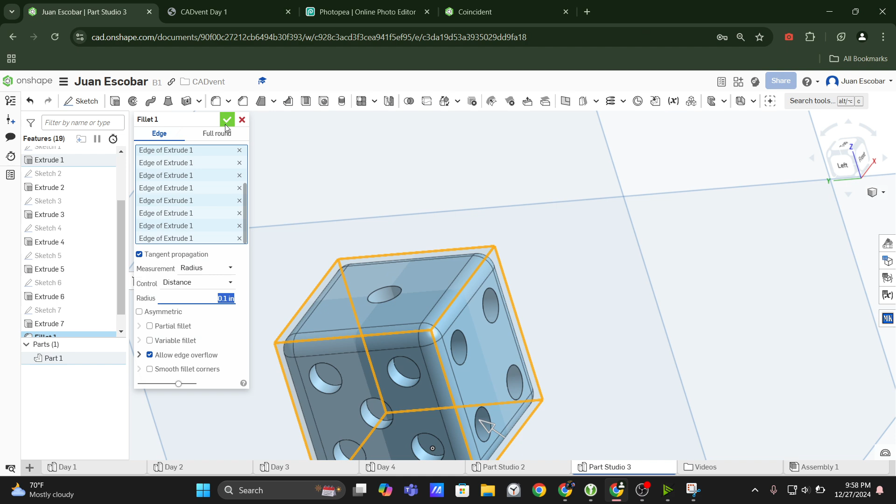And voila, we have finished the very first CADvent drawing. Hopefully that made sense. I'm going to go front, top, right, and look, it looks identical. It looks identical. We made it. We did it. Give yourself a pat on the back and a high five, because hell yeah, we did it.

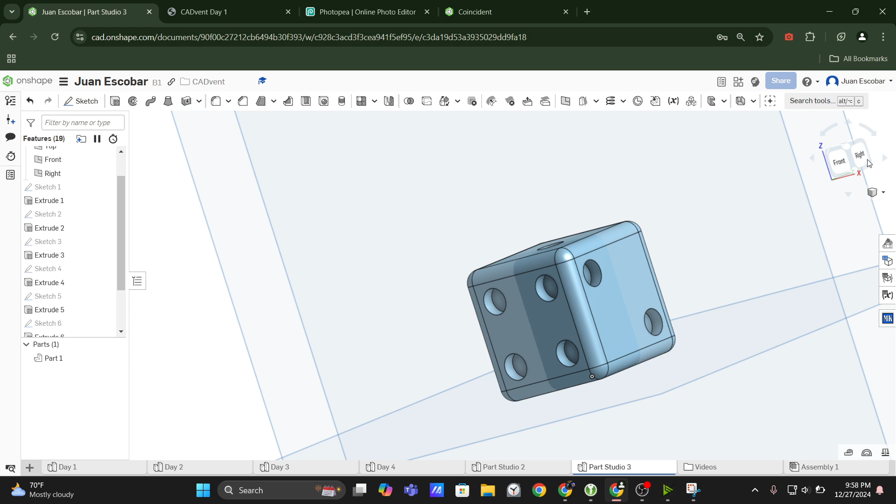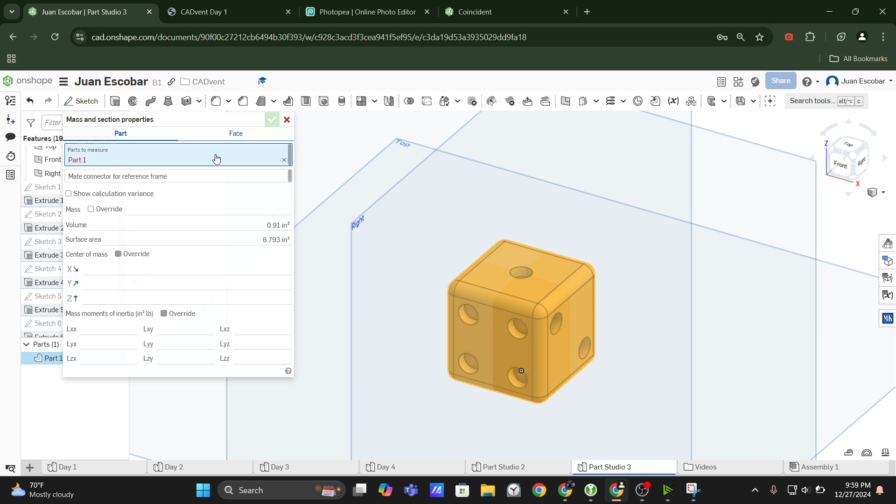By the way, I'm going to show you another quick tool as a last huzzah. There is a tool down here called the mass and section property. I'm going to click on this, and it's going to yell at me, saying one or more parts do not have a material defined. Well, we haven't defined a material. But what you can see here is this has a volume of 0.909614 inches cubed - the amount of space it's taking up. Now this tool is useful because you can see the mass of things.

So let's say you were like, oh, this cube is solid aluminum - first of all, tough, that's awesome. You can click assign material. Let's say I wanted to make it aluminum - this is a little less relevant, but I search aluminum 6061, and that's just an alloy, basically a combination of metals, but it's aluminum.

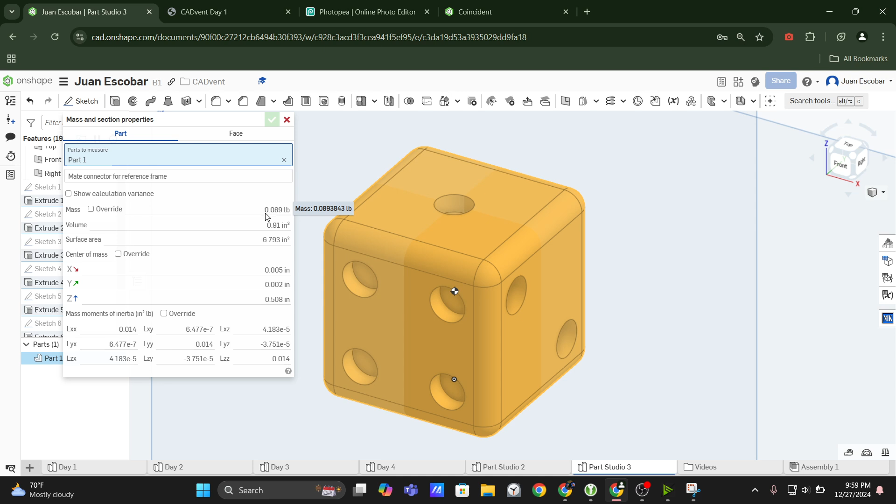And I'm going to click check because that tells you the density. You can know the density if you know how much space something takes up and how dense the material making it up is - you know how much stuff actually is there, and you can calculate the mass. So this mass would be about 0.09 pounds, which is pretty heavy for a cube, pretty heavy guy there.